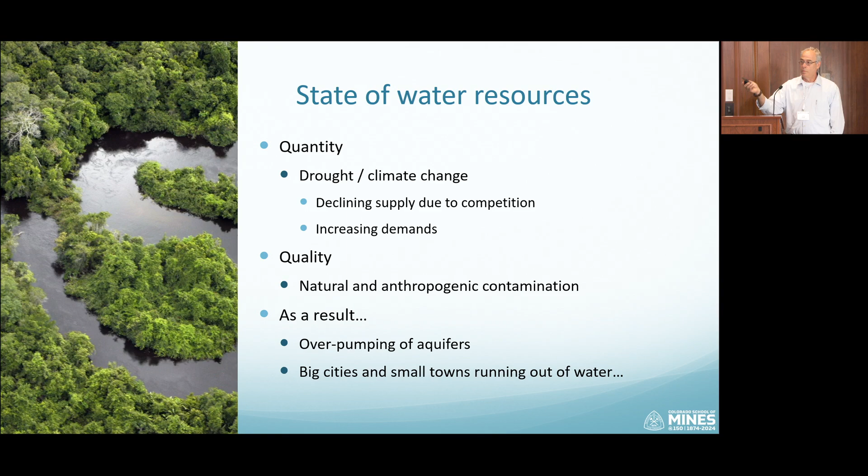So we have to think about where we are taking the next gallon of water. Of course, we can do seawater desalination, but that doesn't help inland communities. In Israel, probably it's easier because you're closer to the coast, but here it's more difficult. We can tap deeper wells, but that comes with a cost, with energy, and with higher salinity that requires us to go back to desalination.

And of course we can do water reuse, and for a very long time we're doing non-potable reuse. Israel is a great example of how you're doing it well, and more we are pushing into potable reuse. Under potable reuse, there are two options: indirect potable reuse, going through an environmental buffer to remove some of the yuck factor from the water, and direct potable reuse, so pipe to pipe, taking water, blending it with other water or as is.

And I didn't have to be persuaded to do research on direct potable reuse. When I was a graduate student with my dear advisor, Professor Childress, she pulled me into research funded by NASA on potable reuse for space applications, long-term space missions to Mars.

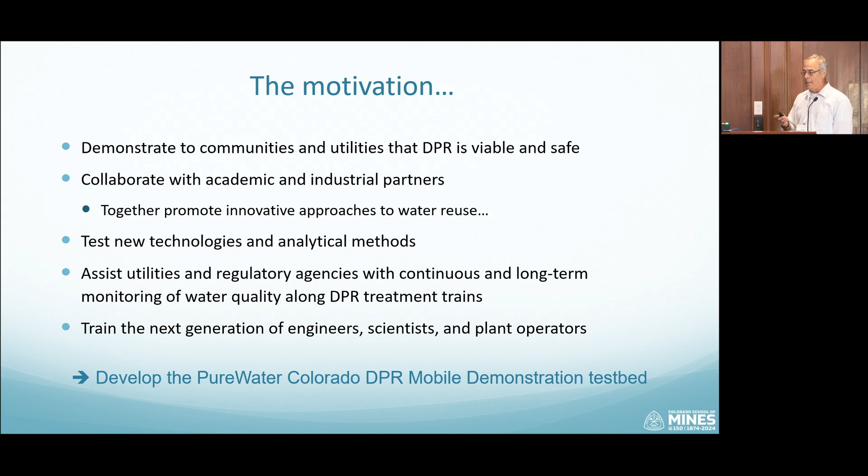And we built it in the form of a test bed where people can do collaboration in the research. This is an advanced treatment system with many processes pushed into this long and tall trailer, with the capability to compare side-by-side carbon-based versus RO-based direct potable reuse. So this is a quick trip into the trailer.

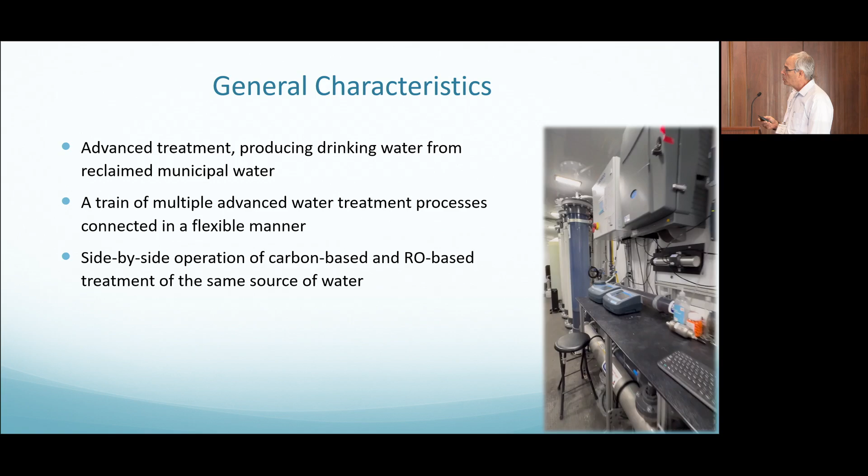First thing that you'll see on the left, sorry, the floor was not so clean, but Amiad filter from Israel, self-cleaning, followed by ozonation, several biologically active filters, carbon, and going into ultrafiltration system. Initially, it was microfiltration. We are all the time changing technologies.

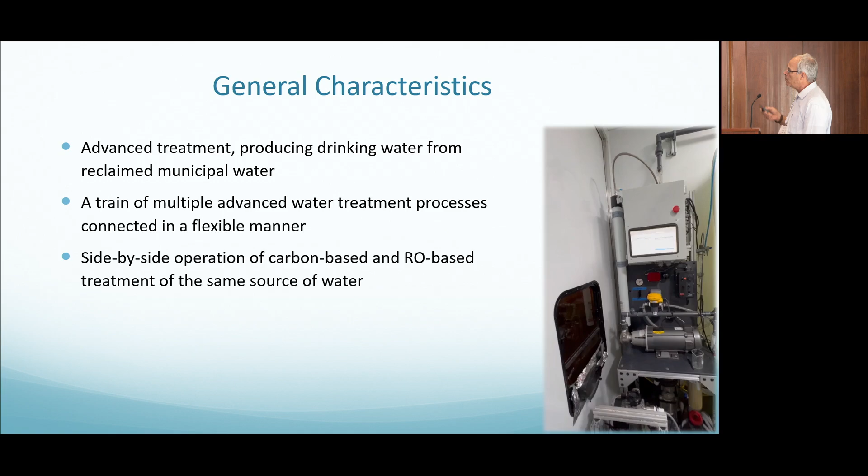Again, then moving to the right, a small CCD or CCRO RO system for parallel desalination, adsorption columns with different media, and then UV AOP and disinfection.

Overall, what we have there is a main train that treats around 7,000 gallons per day of reclaimed water, turns it into drinking water, fully automated, remotely or locally controlled, and a small side stream reverse osmosis system that's much smaller, that is also fully automated and can be operated remotely or locally.

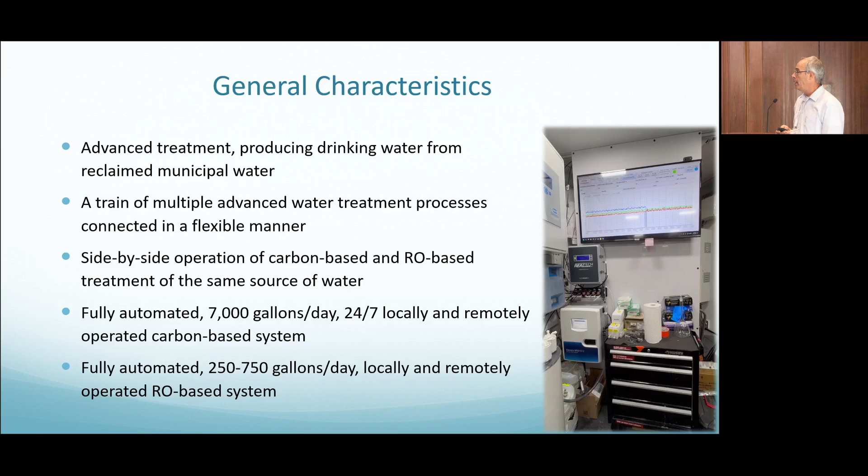So, I called it an ultimate test bed because it can bring, and it already brings, different disciplines to work together on one platform. We already created a very unique collaboration with different universities and national labs, and we were able to pull together many industries to help us both support the research, but also provide unique equipment for this trailer.

We deployed first in June of 2021, just coming out of COVID, in Colorado Springs. After a year, we moved to the city of Aurora, just east of Denver. Then after a little bit over a year, we moved to the city of Littleton, Englewood, and recently we moved to Denver Metro.

Unique things about it is that these first three are small plants, approximately 5 million gallons per day, and they are all tertiary treatment. So the water that we got into the trailer is relatively clean. And the big challenge started in May when we moved to a 150 million gallons per day wastewater treatment plant that's doing only secondary treatment, and that's very challenging on a system like that. So one of the conclusions is that tertiary treatment is really needed for potable reuse.

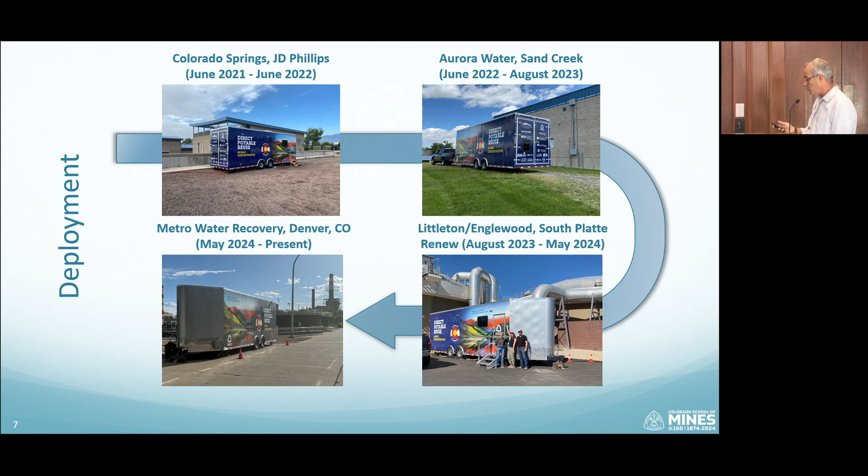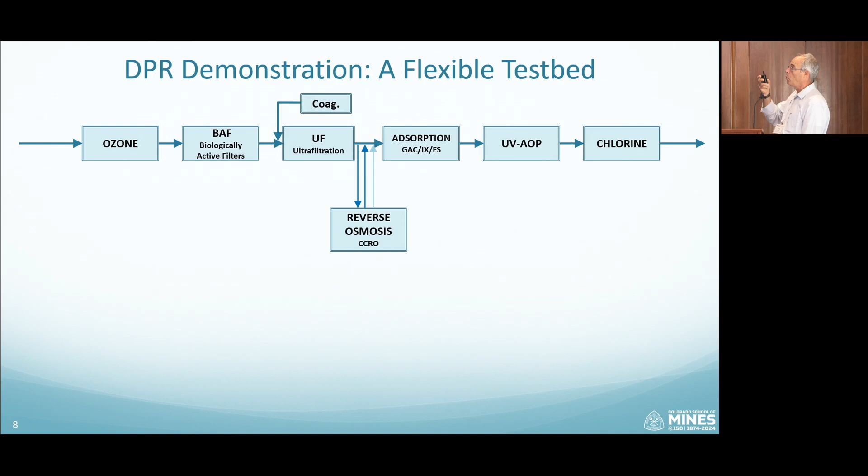It's currently supporting more than 7 mainly graduate and a few undergraduate students and 2 postdocs. So again, going into the treatment train, ozone, BAF, UF with pre-coagulation, adsorption with different media, UV AOP, and chlorination, with, again, the side stream of the reverse osmosis that takes water after UF, but returns the brine and the permeate back into the system. That was the sort of initial configuration.

We recently added a parallel train of UV LED in parallel to low pressure UV. And at the beginning, we operated with 4 GAC columns in parallel, and last year we moved to 2 pairs of columns in parallel, sort of 2 columns in series, but 2 in parallel, 1 GAC followed by ion exchange specific resin for PFAS removal, and the other pair GAC followed by Fluoro-Sorb, which is a unique organoclay also for PFAS removal.

As we move forward with the upcoming project, we will focus more on the comparison between RO-based and carbon-based DPR, and we'll deploy our RO followed again by UV AOP.

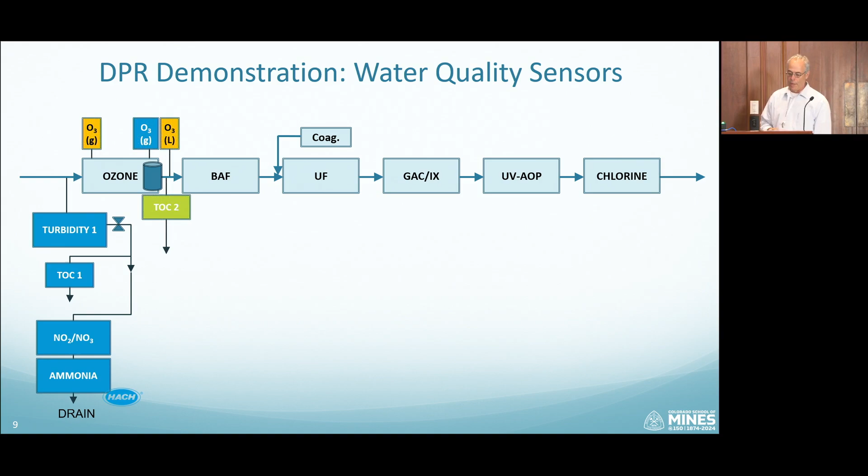We packed this trailer with many, many sensors in order to enable, again, and Megan gave a good introduction yesterday in her talk, to be able to do more data science in this trailer. So you can see here that we packed sensors around the ozone generator, many turbidity meters, many carbon analyzers, nutrients, pH, dissolved oxygen, UV, chlorine, a lot of ways to generate many data points as we operate.

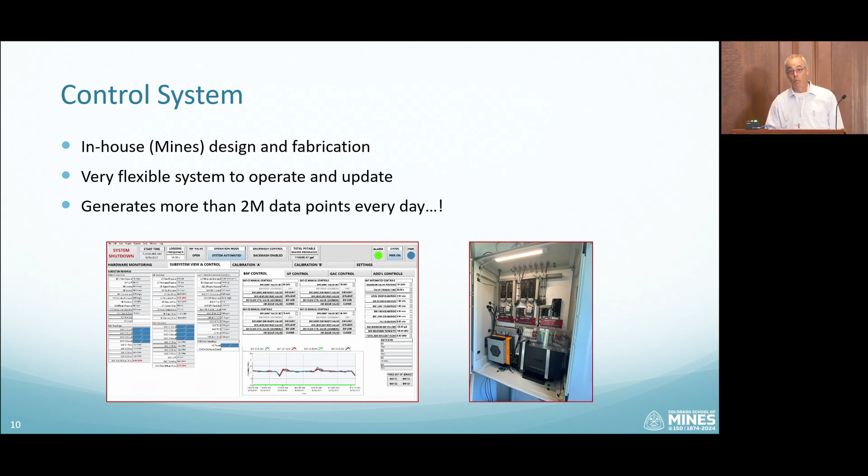And of course, in parallel, we do sampling campaigns to look at things that you can't measure with these small or simple sensors. We built a very sophisticated control system in-house, again, remotely controlled. Most of the time, this is an autonomous system that operates by itself. And when we collect data every 10 seconds, we're generating 2 million data points every day. When we go to 1 second, we generate many millions of data points every day.

It, of course, came with many challenges to build something like that, maximizing processes in a small footprint. Height is an issue, so most of the columns, the biologically active filters and the adsorption columns, operate under pressure. Because you have a mix of continuous processes with intermittent processes like ultrafiltration that need periodic backwash. We didn't have much money, so we had only 1 membrane.

You had to install a few buffer tanks or break tanks in the system in order to facilitate continuous operation. Finding the right size of some processes is not easy. We started with a very oversized UV, but since then we improved the situation. And again, maximizing data collection with a small number of sensors, but we were fortunate.

Hach, which is a leading company in sensors, put a contribution of more than $150,000 to really make sure that we collect a lot of data. So what projects are we currently running in this trailer?

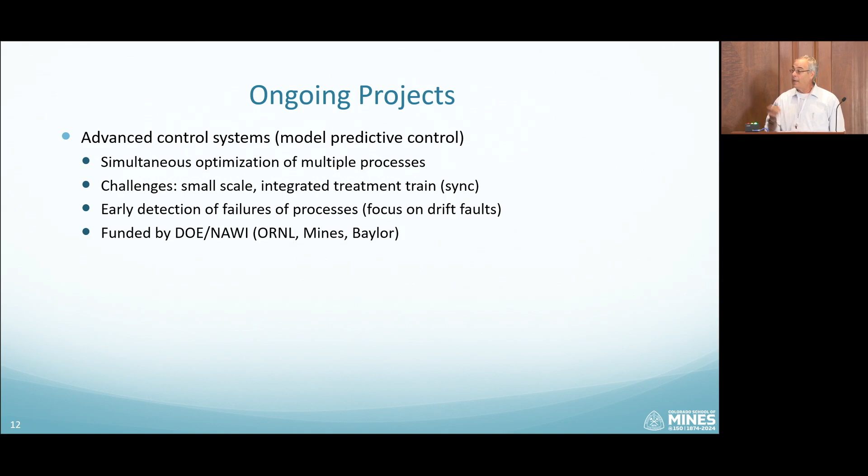The other project is focusing more on water quality. This is a project funded by the EPA with unique collaboration with the Water Research Foundation, CU Boulder, and Southern Nevada Water Authority. That's where we do a lot of modeling and validation of water quality improvements.

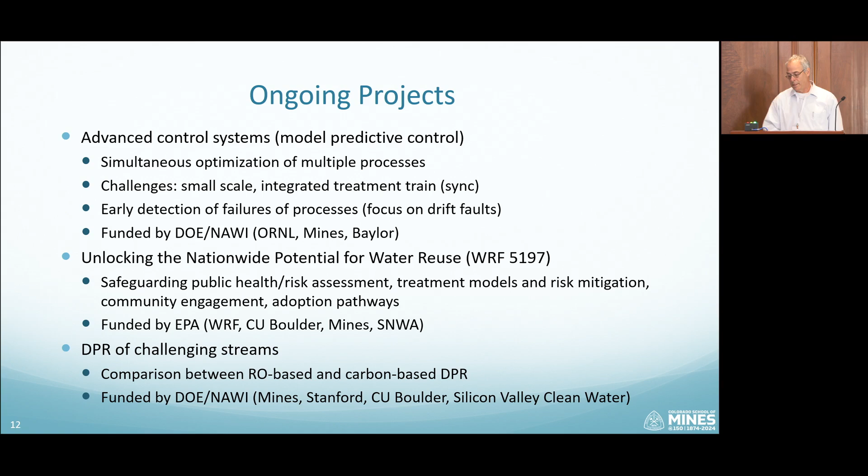And the most recent project that we have just started, also funded by NAWI, is looking at more challenging water going into systems like that, and more deeply looking at the comparison between RO-based and carbon-based DPR. That's a collaboration with Megan and Bill Mitch at Stanford, Karl Linden at Boulder. And that will be the first time that we're taking this trailer outside of Colorado, and we'll deploy at Silicon Valley Clean Water in Redwood City in California.

So a few examples. Again, Megan talked about digital twins and how to implement it. And I'll give you a very nice example of how we started doing it in the trailer. The unique thing about this is that you have to define an objective function of what you want your system to achieve automatically. And in our case, we said we want to minimize energy consumption, specific energy consumption, and maximize recovery.

And we started it with a small reverse osmosis system. It's a CCRO, again, technology that started in Israel. The idea is that you concentrate water in a closed loop, and once in a while dump the salt, bring new water, and concentrate it.

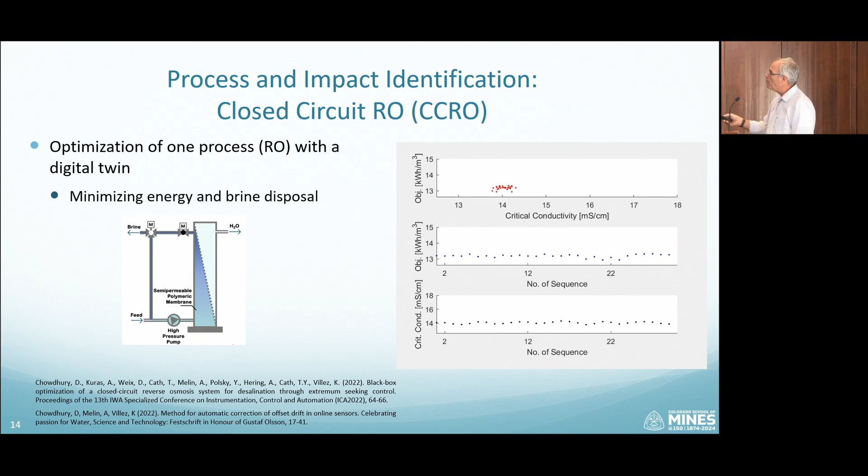What you see on the top graph here, on the y-axis, you have the one objective function of the specific energy, and on the x-axis, you have the conductivity of the brine that you're discharging. So this is the second objective function, and pretty much you want to maximize the concentration, which means that you maximize your water recovery. The other two graphs are the same graphs, but just as a function of how many concentration cycles we're going through.

And so you can see here what the computer is trying to do. It starts seeking an optimal point for both objective functions. We want to operate at the bottom point here, highest concentration and lowest energy. And you can see that it starts somewhere here. It says it's not a good point. It's going up to there and slowly drifting and finding a location here.

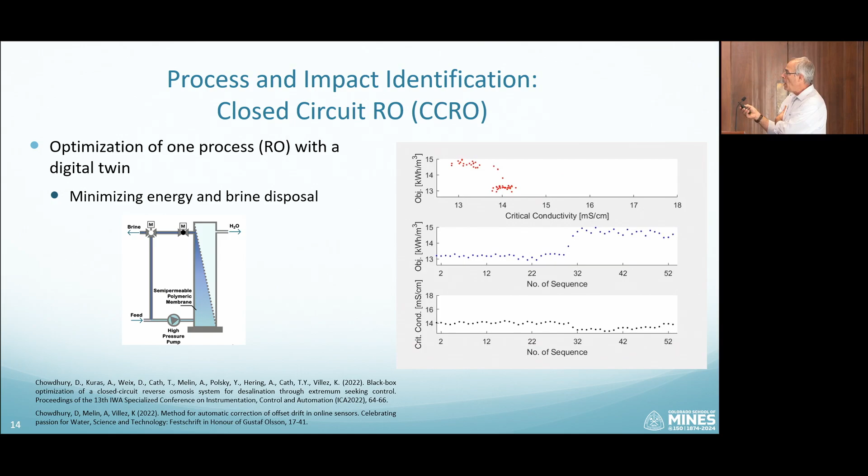Now, it takes many cycles of concentration to do it, and one of the objectives of the research now is to minimize how many cycles it will take for the computer to seek the optimal point. And what we're going to do is to now take all the processes in this trailer and do the same thing and eventually combine them together.

So, one example of the things that we do in preparation for that is what we call process and impact identification, to dynamically understand how each process is affected by things that happen within the process, but also how one process affects downstream processes. One example is our ultrafiltration unit. We are backwashing every 30 minutes. It takes around 4 minutes to do it. And we are dosing coagulant ahead of the membranes, and it's a common practice.

But when we started operating with continuous dosing of coagulant, that caused severe fouling on the membrane. And what you can see here is that we are accumulating head loss, or increasing the pressure, because of fouling very quickly. And it was a nightmare because we had to do clean in place every week or even less than a week.

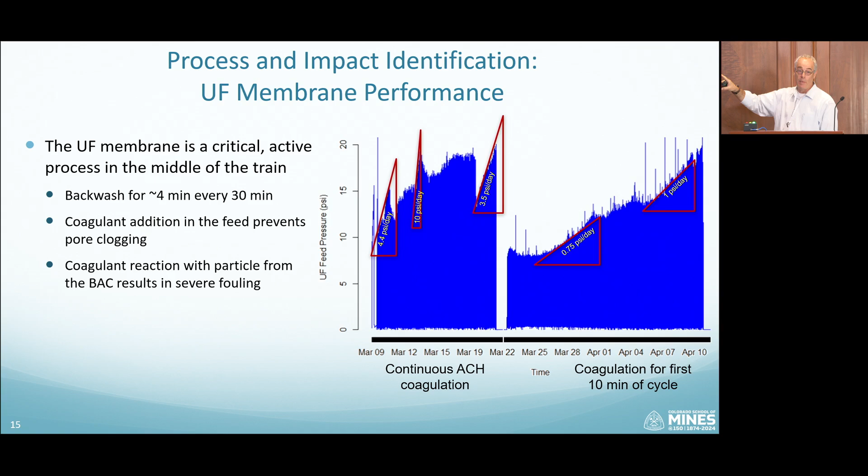But then we found a paper from a group in Israel that looked at optimizing ultrafiltration before seawater desalination. And they showed that if you do intermittent dosing of coagulant, you can save a lot of headache. And that's what we saw after we decided to do only 10 minutes of coagulation in every cycle. You can see that the head loss increase is much, much slower. Currently, we are doing clean in place only every 5 to 6 weeks, and machine learning and digital twins will be able to figure out how much longer I can run between backwashes, and how long to do dosing.

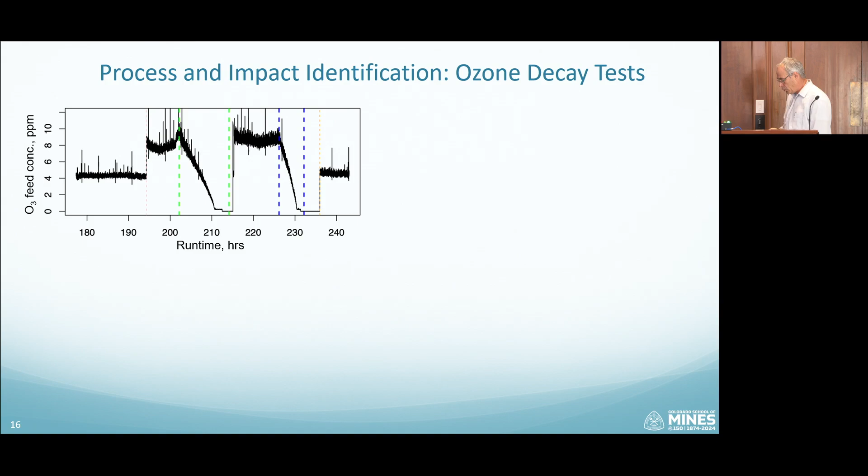Another example of process impact identification, looking at ozone and how it impacts downstream processes. So here we run experiments where we were slowly stopping the ozone dosing, or reducing the ozone dosing, initially for 12 hours and then in another experiment for 6 hours. What we really monitor and target is a very specific ozone to TOC ratio. This is a requirement for direct potable reuse.

And of course, if the ozone dose goes down, the ozone to TOC ratio also goes down, since the TOC doesn't change much. But uniquely, you can see that during these experiments, the TOC concentrations start increasing. And this increase in TOC, and probably also changes in the characteristics of TOC, causes severe performance issues in the ultrafiltration unit. You can see a very fast increase in transmembrane pressure across the membrane because of this additional fouling that goes into the membrane.

Again, these are things that you cannot do in a water treatment plant or in a wastewater treatment plant. You cannot stop and introduce faults or problems. This is something that you can do in a unit like that. And of course, looking at energy consumption within the trailer, if the ozone dose goes down, the energy consumption goes down.

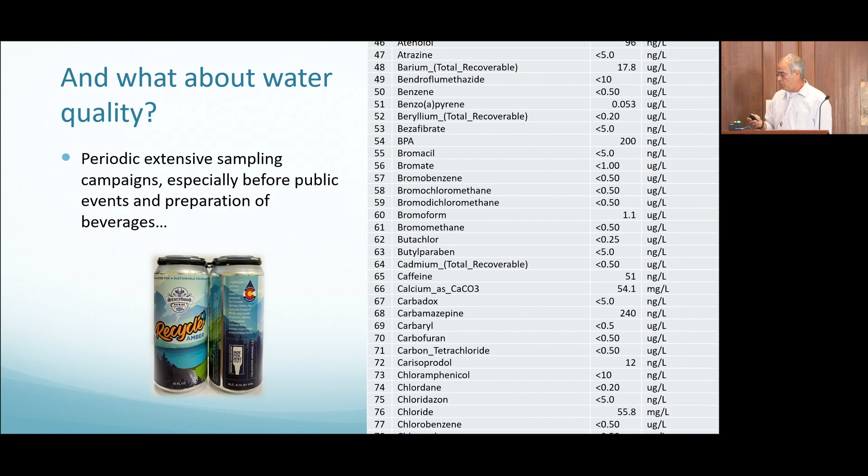Talking a little bit about water quality going in and out of this trailer, we are running periodic, extensive analytical or sampling campaigns, especially before we make water for public events. We made a few batches of beer. There's one big batch of whiskey now in preparation, so if you want, add yourself to the list. And so we are looking into what's happening to the water. So I'll just give you a few examples of what we see in this trailer.

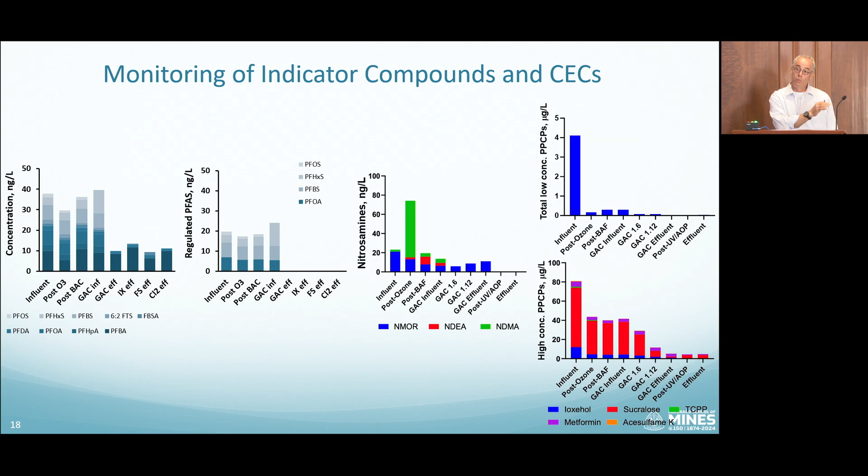And of course, we're doing research on other emerging contaminants of concern. On the top, the sum of small concentrations of different PPCPs. And again, you can see that there's a high dependence on GAC to do most of the work. But we also have to think about whether that is the solution, knowing that we need more pre-treatment to protect some of these downstream processes. This is all fresh data from the last few weeks.

One of the things we are now involved in researching in Colorado is how to prepare communities and utilities for new regulations. Specifically, I'm referring to Regulation 31 in Colorado, which talks about improving or maintaining surface water quality. That immediately means that your discharge quality will have to improve. The target for Colorado is that by 2037, which is a long time, but for a large utility it's not so long, we're talking about reducing discharge standards to 2 milligrams per liter total nitrogen and less than 0.2 milligrams per liter total phosphorus from current levels.

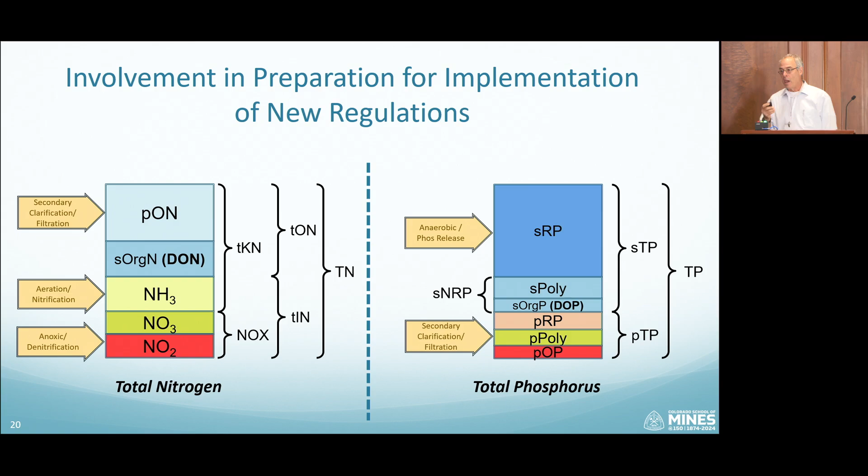That's not simple. You can see the same thing in the phosphorus system. We know how to remove particulate. The soluble reactive phosphorus, phosphate, we know how to remove. But again, when it comes to dissolved organic phosphorus, you are in a big challenge.

So when you are a utility whose dissolved organic nitrogen discharge is at 1.5 milligrams per liter, and your regulation is going to be 2 milligrams per liter, you start scrambling and figuring out how do I remove this total organic nitrogen.

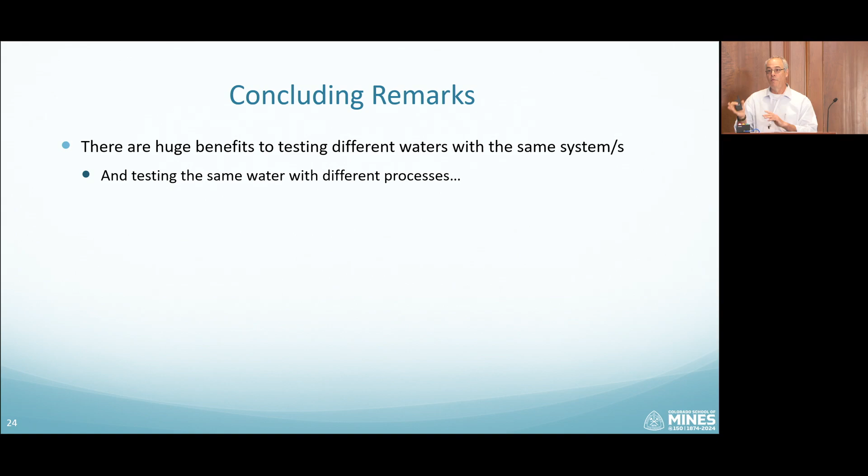At the same time, it's very interesting that you have two trains of different processes and you can compare between different approaches.

I didn't show much, but I can tell you it's a nightmare treating secondary effluent compared to tertiary effluent. This is something we've been struggling with for several months now. And RO is not always the key for successful DPR.

I think that will be fun to do—more deeper research in California next year.

Small communities will probably implement things like that, and advanced control systems and data—better understanding the data to your advantage—are critical for the future of water and wastewater.

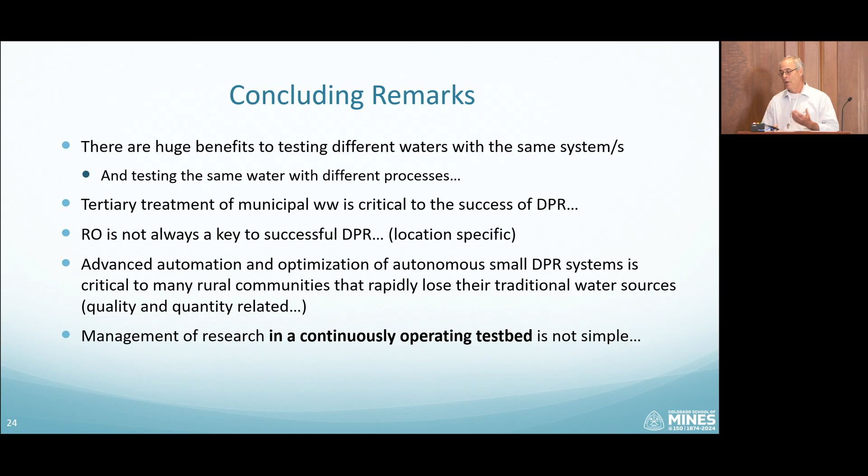I think the important thing that I learned is that managing many projects in a small footprint is not simple. You have different students running different experiments at the same time. Managing who is doing what, so as not to impact other projects, is not simple. But it's fun. So thank you, everybody.

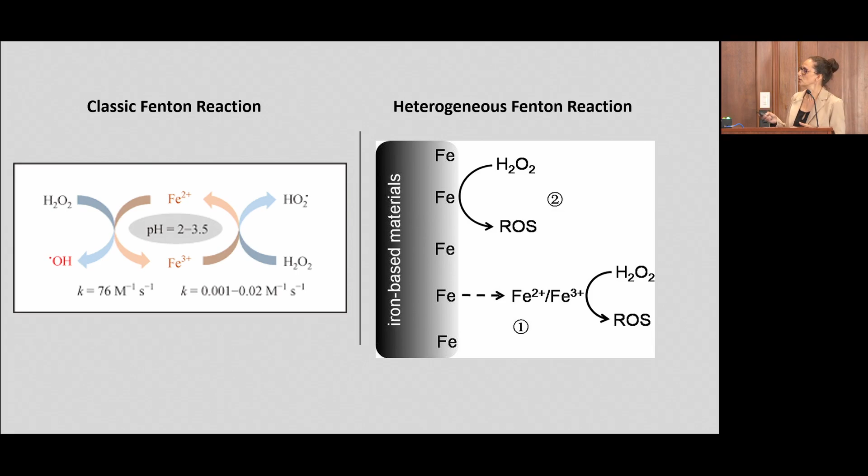So a lot of work has been done on trying to use heterogeneous Fenton reactions as an advanced oxidation process. In our lab we've been working with clay minerals and oxides as sorbents, and the idea was to combine the two technologies together. Can we remove the pollutant and then use the adsorbent also as a catalyst?

The reason we use clay minerals is that they're very low cost, abundant, and not toxic. They have a huge surface area. The surface area of Montmorillonite, which is the clay we use, is about 800 meters squared per gram, which is about 2 basketball courts for 1 gram of clay.

So it can be used as a sorbent very efficiently, and we can also alter the surface properties to make it more specific towards the targeted pollutants we want to address.

The idea was to take iron oxides and precipitate them on the clay mineral surface. The clay would be used as a support and as an adsorbent, and the iron oxides can be deposited in nano-size form, creating a large surface area that's very reactive, both as a catalyst and as an adsorbent. So we started out doing that.

This is work done by one of my postdocs, Dr. Maria Joffe. She synthesized several clay minerals and deposited different species of iron oxide on the clay. We looked at hematite, magnetite, and we also deposited amorphous iron oxide on that clay. We did a lot of characterization.

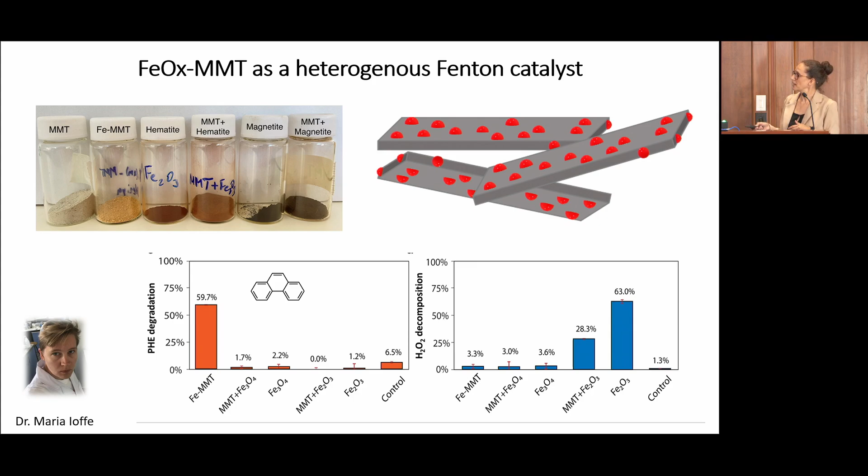So some of the surfaces activate hydrogen peroxide decomposition, but that doesn't mean it creates the right radicals to degrade the phenanthrene. The iron-clay composite that worked best was this one, amorphous iron oxide with a lot of hydroxyls, iron oxyhydroxide, which degraded phenanthrene quite well, and the amount of hydrogen peroxide decomposed was quite low.

You can see here, again, the decomposition over time, or the destruction and degradation over time, of phenanthrene, and you can see the decomposition of hydrogen peroxide. So you need a very small amount of hydrogen peroxide to get quite nice degradation of phenanthrene.

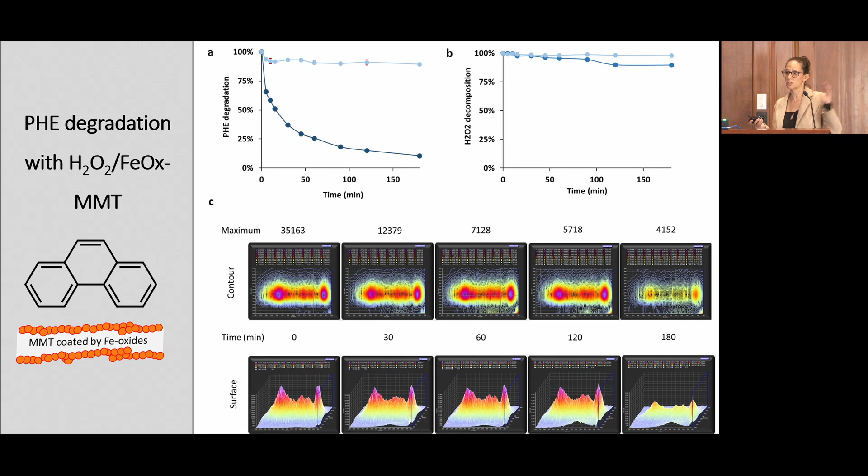We looked for byproducts in the solution using GCMS and EEMs, but we couldn't find any coming up. So our thought was that maybe the rate limiting step was the diffusion of phenanthrene to the surface, and the degradation occurs quite quickly, which is why we're not seeing any byproducts.

One more interesting thing we found is that if we add hydrogen peroxide before the phenanthrene, we can still get quite nice degradation. So we add hydrogen peroxide, and it gets pre-adsorbed to the surface, but it doesn't decompose. Then when we add the phenanthrene, it gets degraded, which is quite interesting. What we think is happening is that the phenanthrene reaches the surface where the hydrogen peroxide is complexed with the iron oxide, and then the whole thing is activated.

We did this kind of cycle experiment where we added hydrogen peroxide, the catalyst, and phenanthrene. After the phenanthrene was degraded, we spiked with more phenanthrene without adding more hydrogen peroxide. This is the graph you see here. Every time we spiked with phenanthrene, we can see the degradation, and we can also see the decomposition of hydrogen peroxide. Every time we add more phenanthrene without adding more hydrogen peroxide, it gets decomposed, kind of linearly as well.

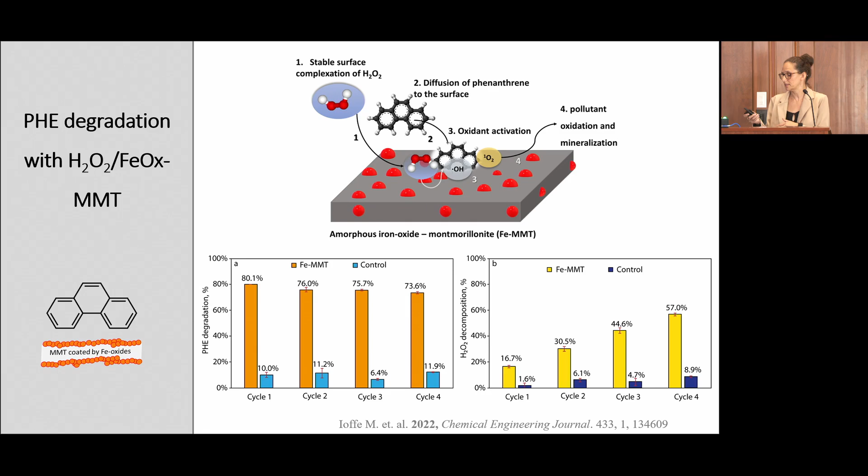So we looked at catechol in the system, because catechols, which are species with a benzene ring with two adjacent hydroxyl groups, can complex with iron and reduce it, at least in solution. We asked whether adding this to the system would reduce the iron on the surface of our clay, and whether this could initiate faster hydrogen peroxide decomposition or activation, enhancing the formation of reactive oxygen species. So the question was, will the catechol, or in this case the gallic acid, reduce the iron on the surface of the clay, and will that enhance the decomposition of hydrogen peroxide?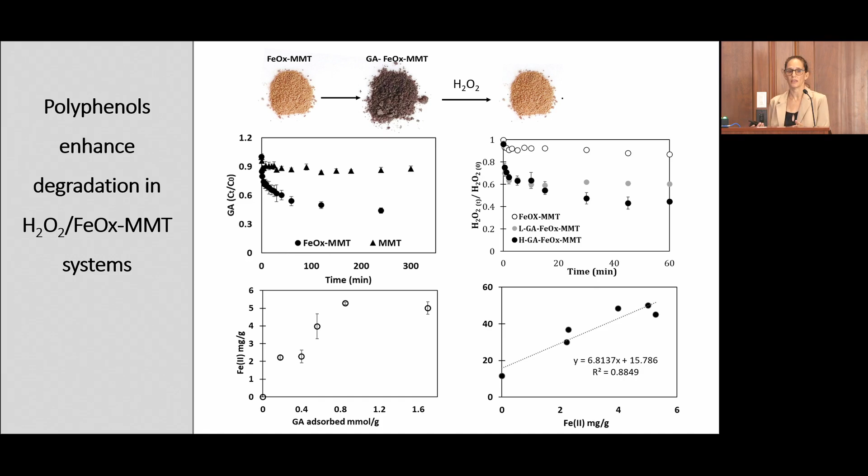So if we think about this, if we have a wastewater rich with phenols and catechols, this might be a very good system to try to degrade them. So we looked at exactly that. We chose 5 different polyphenols that you might find in olive mill wastewater or winery wastewater, with a bit of variation in structure, and wanted to see whether this type of adsorption-degradation reaction could work for these compounds. So we chose these 5 compounds here.

Spoiler. So we chose these 5 compounds here that you see. 2 of them have catechols, so it has the benzene ring with the 2 hydroxyls - that's the CC and the DHB. And the other 3 have similar structures, but not exactly a catechol structure. We looked at the adsorption, and then we looked at the degradation.

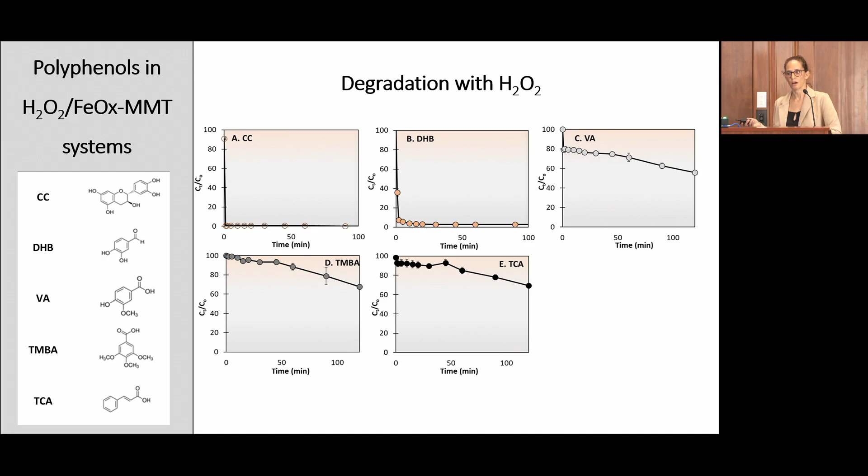We looked at the different species of radicals, and we saw that you can get 3 or 4 different reactive oxygen species, but I want to show the most important point here.

So what we're thinking is going on is that these catechols complex with the surface, reduce the iron, and enhance the reactive oxygen species formation, which can then leave the boundary layer and also attack the pollutants in the water.

Thinking about this and going forward, we said, okay, we really want to create a platform that attracts the pollutants to the surface, and then we can degrade them more easily. So we created a composite that had both the catalyst we were talking about before, the iron-decorated clay, but also we added a polymer whose job was to attract different micropollutants.

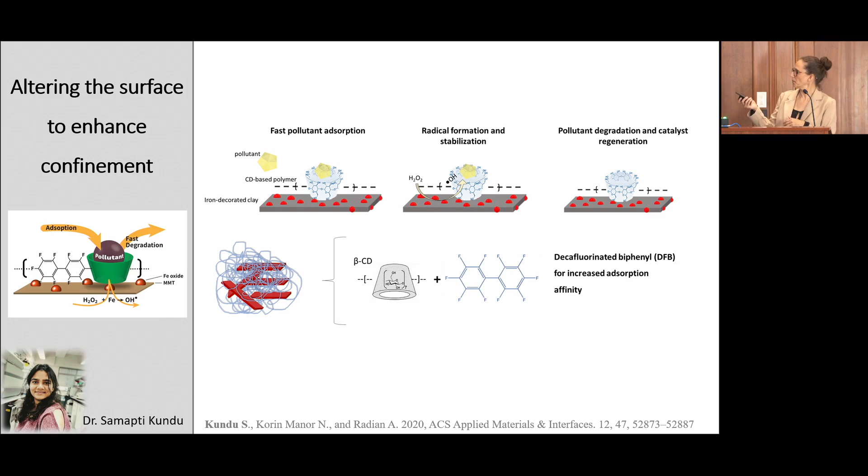The composite was created by polymerizing these monomers to a polymer and kind of intercalating the clay within. And we looked at several different compounds.

Initially, we looked at 3 different compounds, the compounds in green, to get an overview of whether it's good for the removal of organic pollutants in general. And then we looked specifically at PFAS removal and degradation, because PFAS are the most recalcitrant family.

So just to show the first part, we looked at bisphenol A, carbamazepine, and PFOA, the 8-carbon chained perfluorinated compound. You can see here the adsorption to all the different parts of our composite - to the Montmorillonite clay with the iron oxide, to the Montmorillonite clay with the iron oxide and the beta-cyclodextrin, Montmorillonite clay, iron oxide, and just the biphenyl perfluorinated polymer, and then the whole composite together.

We can see that each one of the pollutants has an affinity to a different part of the composite. We have carbamazepine, in blue, which likes the clay iron oxide. And we have bisphenol A, which likes the beta-cyclodextrin cup. And then we have PFOA, which is adsorbed to the polymer mostly, but also a little bit to the beta-cyclodextrin cup. So that was in terms of adsorption.

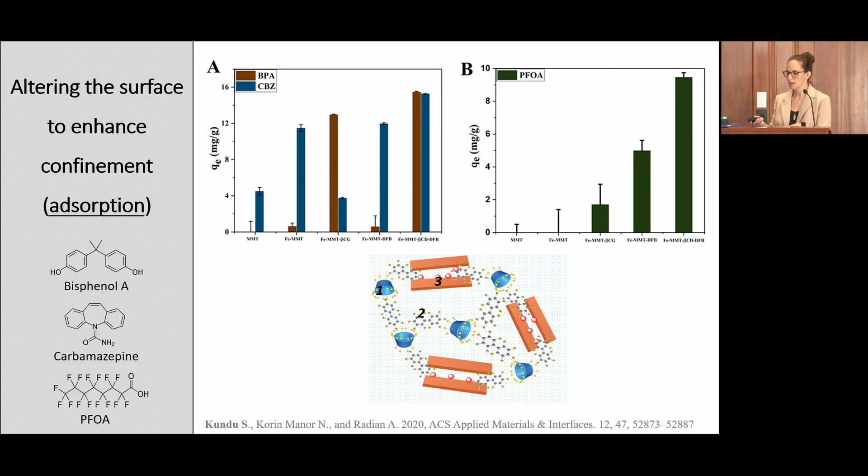We can get really nice adsorption trends. And when we add hydrogen peroxide, we could also see the degradation of all of these 3 compounds, even though their recalcitrance is very different.

We were quite pleasantly surprised that even the PFOA was degraded quite nicely, and I'll show some byproducts in a minute. We can get quite versatile results in terms of the different types of pollutants we're removing, and we can degrade these pollutants after the sorbent is spent. We looked at the different reactive oxygen species, and we mostly saw that the hydroxyl radical was the main species here.

We moved on to looking at perfluorinated compounds, and we took 7 different perfluorinated compounds that you see here. On the x-axis, you can see the different amount of carbons in each of the compounds. We looked at the adsorption to the different parts of the composite, and we looked at the degradation. In terms of adsorption, you can see that the larger, more hydrophobic perfluorinated compounds are removed quite well, whereas the small ones are not removed almost at all, and this is something that comes up again and again, and I also saw it in your results, Tahi. So the small ones are very mobile, and they don't adsorb to anything.

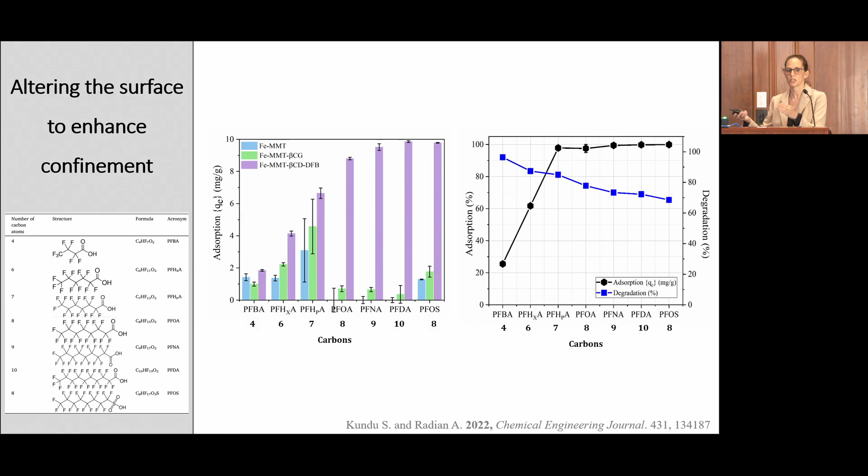But the small fraction that does adsorb is degraded quite nicely, and as we increase the chain length of the perfluorinated compounds, the degradation decreases a little bit, but it's still 70% degradation.

So it's not complete mineralization. We can see some of the six carbon chain perfluorinated compounds coming up in the system, but still we are getting quite nice degradation of these products. But we were still very concerned about the fact that we can't even remove the small compounds, and some of our ongoing work is focused on removing the shorter chained perfluorinated compounds.

So we went back to some of the polymers we've been using in the past that are positively charged. The previous composite is negatively charged, which makes it very difficult to adsorb the small negatively charged polar compounds. So we took the clays and we added some positively charged polymers to see if we can adsorb the PFBA.

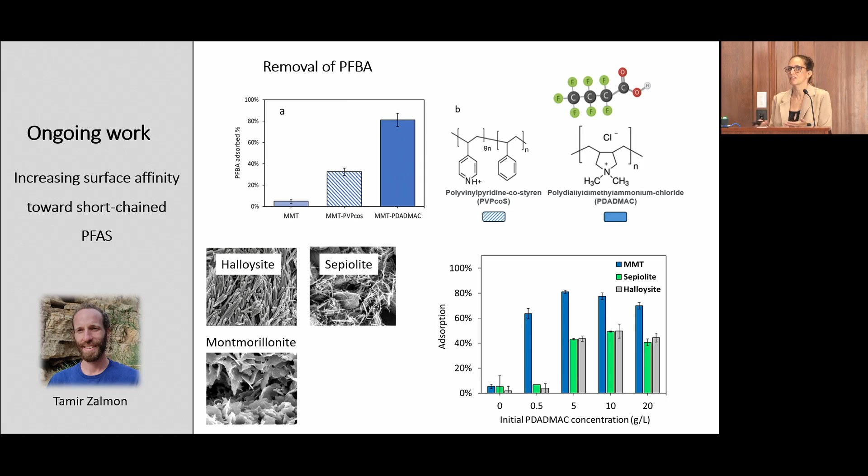If we compare it to the removal of PFOA and PFOS, those are removed much better by this composite. We're getting 99.9% removal of the longer chain perfluorinated compounds and about 80% removal of PFBA, which is quite nice. So if we manage to take care of PFBA, usually that means that we're also removing the bigger ones. These are mostly electrostatic interactions between the negatively charged PFBA and the positively charged composite.

And we wanted to see if we can also degrade it. Just one more word about that: most sorbents, when you add in the longer chain perfluorinated compounds, that hinders the removal of the shorter chain PFAS, but not in our case. There's enough room there for all the PFAS, and also as we increase concentrations, we're actually getting an increase in removal. So there's kind of a priming of the surface that makes it more hydrophobic, and you get higher removal rates.

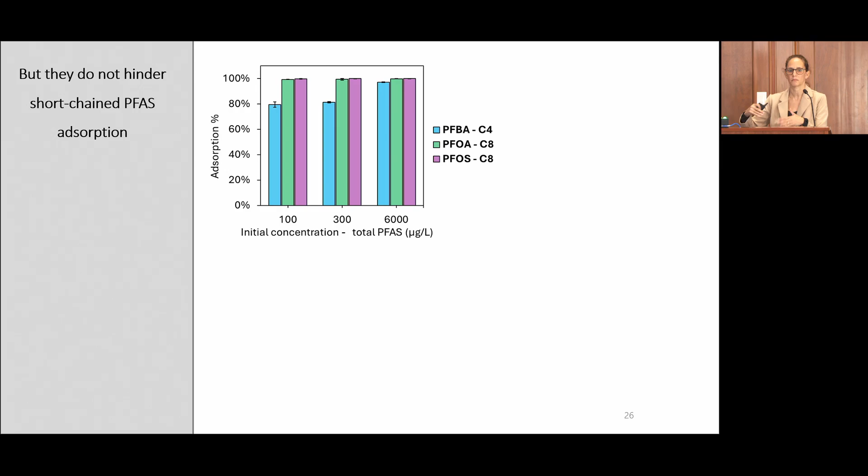What is hindering the removal is salt. Higher concentrations of salt will completely deactivate our sorbent in this case, because these are electrostatic interactions. So going back to what I wanted to say before, we wanted to see if we can degrade what's adsorbed, because we were using the iron clay composite with the polydadmac, and we can get really nice removal rates, but the catalyst is deactivated, because previously the polymer was sitting in between the different clay layers, but now the polydadmac is interacting with the clay surface electrostatically. It's a positively charged polymer, a negatively charged clay, and that's deactivating our catalyst.

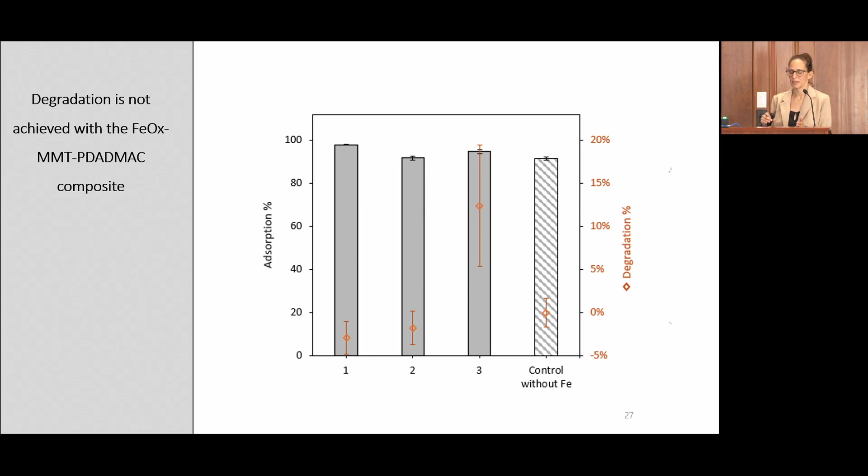So we're getting high removal rates, but about 10% degradation. So this platform is not working for the PFBA, but we did go ahead and test it as just an adsorbent with real water. So we have a groundwater well quite close to where I live in Yokneam, which is contaminated with really high concentrations of just PFBA, which was perfect for our project, but not so great for the locals in terms of the groundwater.

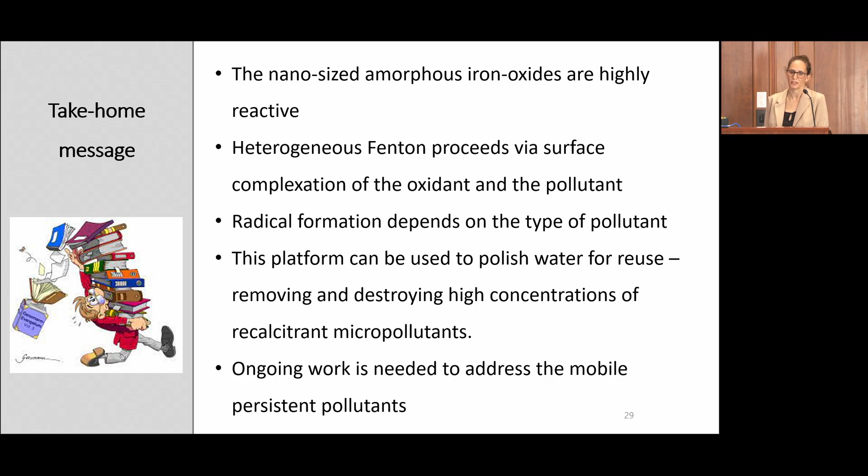What we think is that this platform can be used to polish water for reuse, removing and destroying concentrations of different recalcitrant micropollutants, but for the very mobile, polar, persistent, small compounds, this is still not good enough. So we're still working on it, and hopefully we'll find some solutions in the future.

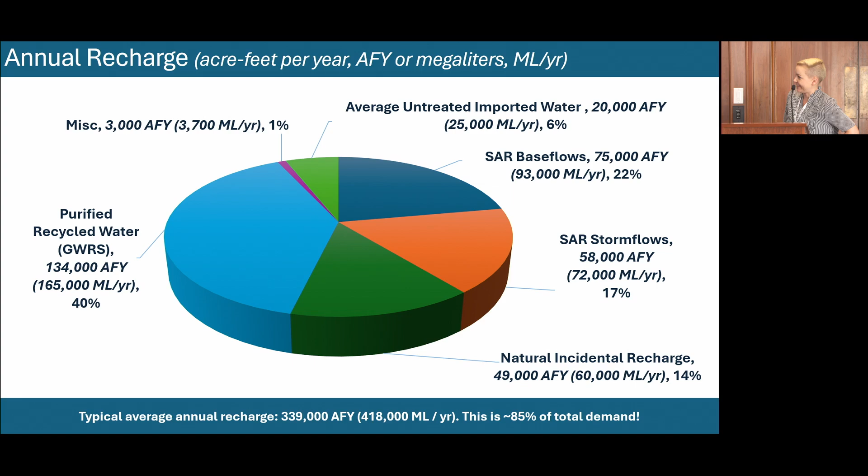Back, okay. I did it again. Pointer. If I say the word somehow, that helps.

So all in all, our typical average annual recharge is about 340,000 acre feet per year, or I tried to do the metric conversion. Maybe I should have done million cubic meters. I think I saw that elsewhere, but about 400,000 megaliters per year. So a lot of recharge.

All right, so just a quick slide on the purification system. We take the effluent, secondary effluent. You can treat it. It works. I know, Zahi, you said you had some challenges in your project, but for us, it's actually secondary effluent from the OC San. We put that through a low-pressure membrane system. Some cells are microfiltration and some cells are ultrafiltration because we've started transitioning to the newer type, the ultrafilters. Reverse osmosis, and then UV with hydrogen peroxide.

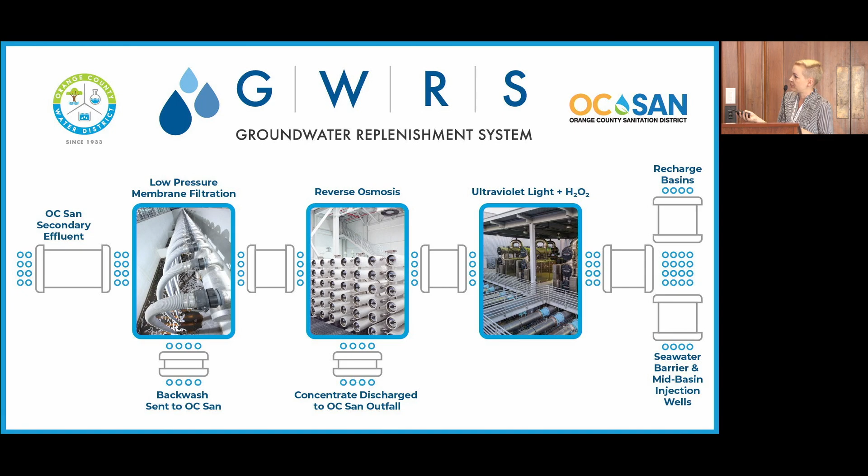So most of the water goes to those spreading ponds like I showed in the picture. We have 1,100 acres, or I think that's about 400 to 500 hectares of wetted lands that we use for recharge. So a lot of recharge spreading ponds. And then about a third goes to injection wells, including for recharge and also for a seawater intrusion barrier.

Okay, so given our mission, which is the big umbrella is groundwater management, and then as part of that, potable reuse on a very large scale, of course, we have no shortage of interesting challenges. With the river system we manage, we have constructed wetlands, endangered species that we have biologists that go out and monitor bird populations. We've got PFAS issues, as I mentioned, we're building 60 different PFAS treatment plants at these groundwater extraction well sites for the drinking water production wells. So lots of PFAS work going on.

We have our advanced water purification plant with membrane fouling and high energy costs. Our energy bill every month is, I think, almost $2 million or so, $1.5 million US dollars. So lots of energy to run the RO. Our recharge basins, of course, clog and have to be managed. We do a lot of piloting of new technologies, which everyone says 6 months and really takes 2 to 3 years for every project. We've had staff retirements, so we're facing that issue of folks retiring, and that knowledge kind of leaves with them sometimes. So lots of different challenges.

One of the ways that we try to address some of this is through maintaining an active R&D program. It's pretty cool, I think, that we have such a program. Of course, I'm biased because I run that program, but it's not so common to hear of a water or a wastewater agency that has a research group. Sometimes they do, and it just goes by a different name, and you have to talk to them to find out. So I'll say a little bit more about that.

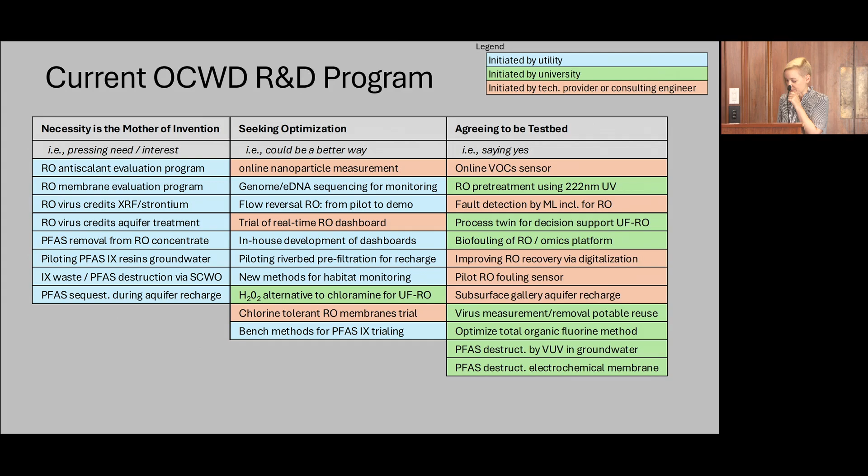A couple takeaways: something I already knew, but it's nice to see in color, is that universities and solutions providers—the green and orange—really do play a significant role in helping us be an innovative water agency. These ideas come from them, and we hear about it because we're trying to get out there and meet people, or they come directly to us because they know somebody.

But I also thought it was interesting that the first column is just all blue. It kind of makes sense, since these are pressing things we think are important issues that need addressing, so we started the project ourselves. But it still surprised me not to see any orange and green there, so I wondered: are the universities and solutions providers doing enough to ask us what our pressing challenges and needs are, to help inspire them to work on those topics?

After I put this slide together, I thought of one example where this was the case—really the only example I can think of. The University of California Irvine has their research center on water called Water UCI, and they actually have a committee of Southern California utilities, which I'm on, where they ask us what topics need attention. We provide some funding, they pool it, try to go out and get grants to match it, and then they do the project.

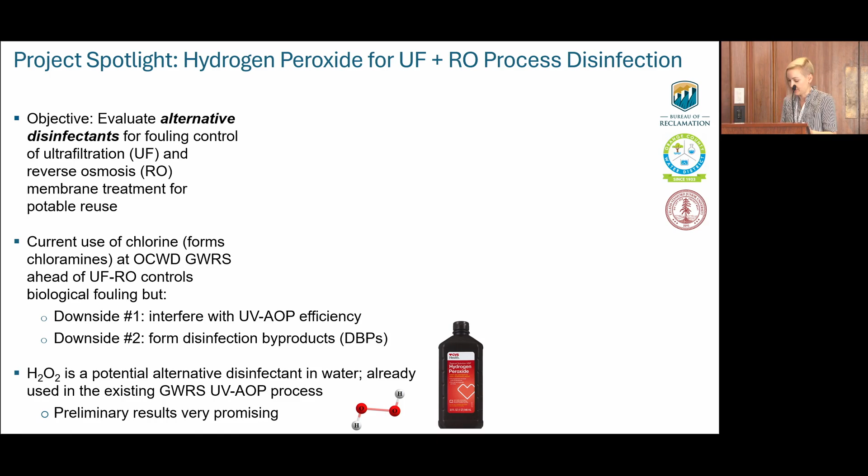But with hydrogen peroxide, we don't see any formation of NDMA or the typical trihalomethanes and haloacetic acids. And we already need hydrogen peroxide for our advanced oxidation process. So we've actually targeted it so that, since we want 4 milligrams per liter of hydrogen peroxide going into the UV AOP, we put enough hydrogen peroxide in, at pilot scale, the feed of the ultrafilter, which then has a demand, but then some residual of hydrogen peroxide makes it to the RO, and that has some demand, and then the residual that makes it to UV AOP would in theory be just what you already need anyway for the advanced oxidation. So pretty elegant.

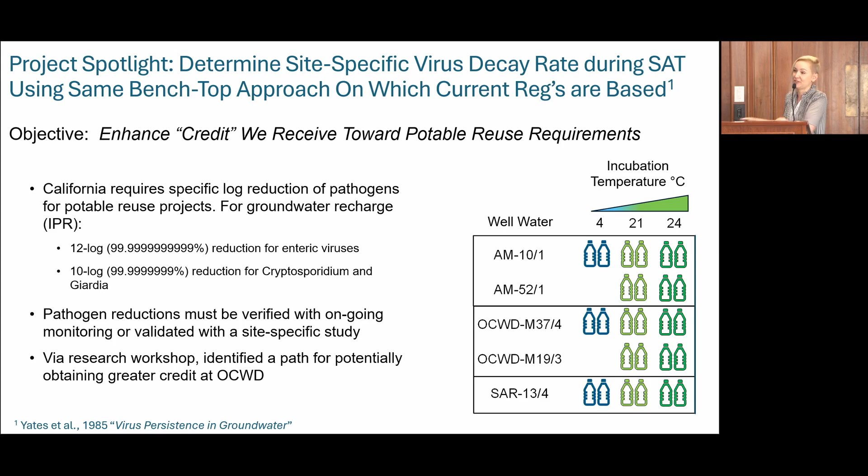I will skip the next project because I'm over time, but this is essentially us trying to get more credit from the regulators for virus removal in the subsurface, the soil aquifer treatment. We take our advanced purified water and put it underground as part of groundwater recharge. So we do enjoy some soil aquifer treatment, but we don't get much virus credit for it. Through a workshop, we heard a retired regulator say that there was a path for doing this in the California regulation, which we didn't understand prior to that. So it really piqued our interest and motivated us to do this project.

All right, I will just wrap up. I won't repeat myself here. Innovation's important, collaboration's important. Thanks so much for your attention.

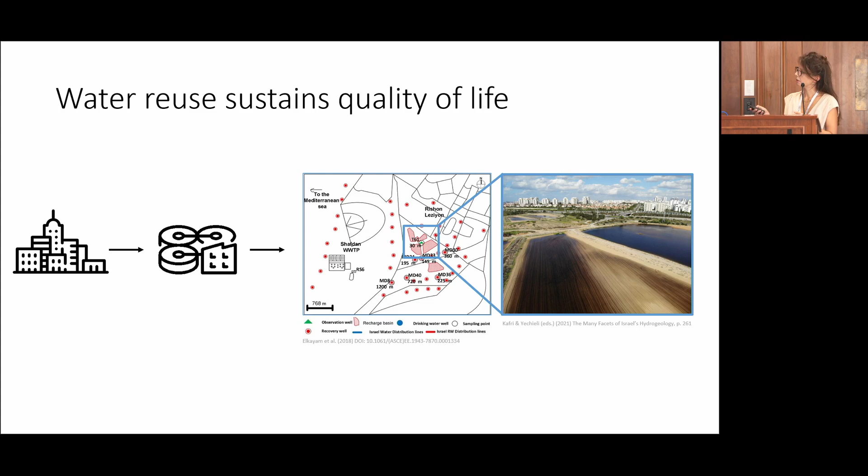We treat our wastewater through conventional primary mechanical treatment, secondary biological treatment, and then, as you heard today and also yesterday, we spread the secondary effluent over infiltration ponds. They go through physical, biological, chemical reaction, and then after 6 to 12 months, they are collected and used for unrestricted irrigation.

So in that scheme, which we already heard about, I want to highlight two important points that I'm going to address today. One is the fate of trace organic chemicals - for example, pharmaceuticals, herbicides, pesticides, hormones, you name it - and also antimicrobial resistant bacteria and genes. What is their fate?

We want to eliminate their presence because we want to reuse the water for irrigation. Another important point is that we want to augment the wastewater amount.

For example, we can receive industrial waste at the municipal treatment plant, but then we need to make sure we have proper pre-treatment beforehand. For example, if we look at the printed circuit board industry, we're talking about large amounts of wastewater that can be released to the municipal treatment plant. However, we need a pre-treatment to remove heavy metal and precious metal from this water.

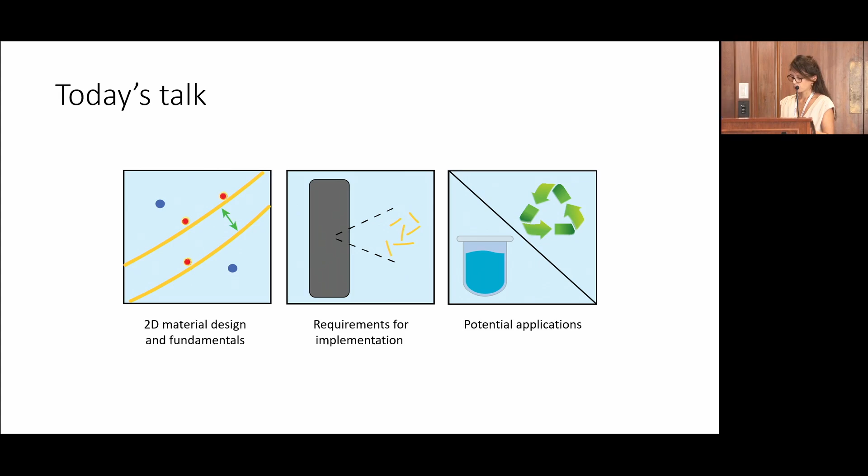So I'm going to touch on these two today. Broadly speaking, I want to go through the design of two-dimensional nanomaterials for adsorption of heavy metal - in that case using molybdenum disulfide - and for catalysis and removal of trace organic contaminants, in that case using manganese oxide nanosheet. In both cases, the focus is given to two-dimensional nanomaterials.

Then we want to go over the requirements for implementation. Let's say we have these nanomaterials - how do we implement them at large scale and then demonstrate the application? So that's the logic scheme of the talk.

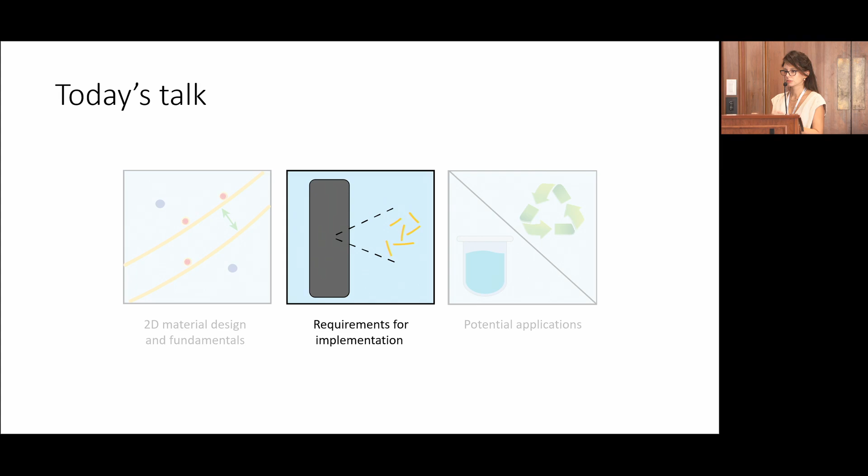But today I want to start from the middle, because I want to talk about the requirements for implementation, not necessarily for my own development, but in general. In case you have a nanomaterial that can be used for water treatment, what do you need in order to implement it at larger scale?

There are many barriers for implementation, which were highlighted in many review papers, starting from upscaling and cost. However, this problem is expected to decrease over time because of the widespread use of nanomaterials in different industries, not necessarily in the environmental context.

The second challenge, or barrier, is maintenance. We want to make sure that we can recover the active nanoparticles from the treated water. We want to regenerate them, we want to reuse them.

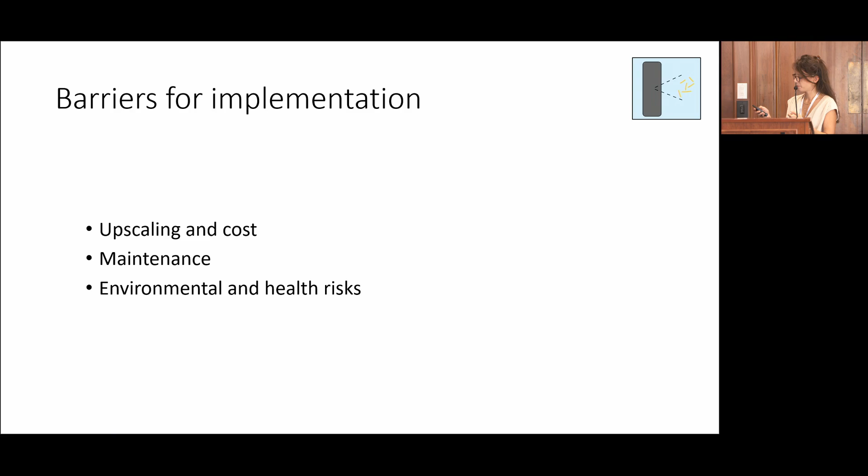Third, we want to avoid any environmental and health risks. This is also important because once we shrink the dimension of a material, different phenomena occur - that's what makes nanomaterial really appropriate and really reactive, and therefore they might have negative aspects that we want to avoid. This was highlighted in different reviews over the years, and we want to make sure that whatever development we work on, we overcome this barrier.

One essential tactic to overcome this barrier is to have a strategic pairing of the nanomaterial with a less mobile platform - something that is much larger and that will make it much easier for use.

So if we want to put it on a scale of time - while the focus so far was given to nanomaterial design, now we want to focus on strategic pairing to platforms in order to allow practical application.

So my lab came up with this platform selection guide because it's important that we select the appropriate platform for the application or the type of nanoparticles that we use.

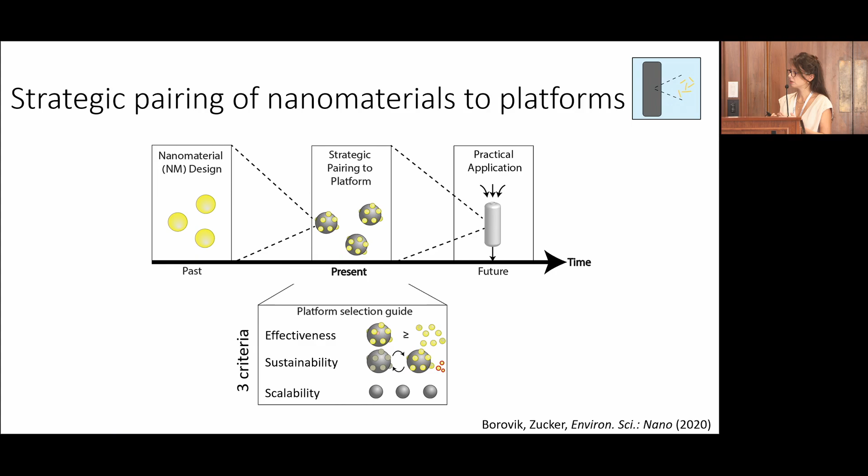This criteria include the effectiveness criterion. We want to make sure that once the nanoparticles are immobilized on top of a larger platform, it will be at least as good as it was compared to suspension form. We want it to be sustainable, to regenerate and reuse this nanocomposite with minimal leaching of the active component, and we want it to be scalable and compatible in large treatment plants.

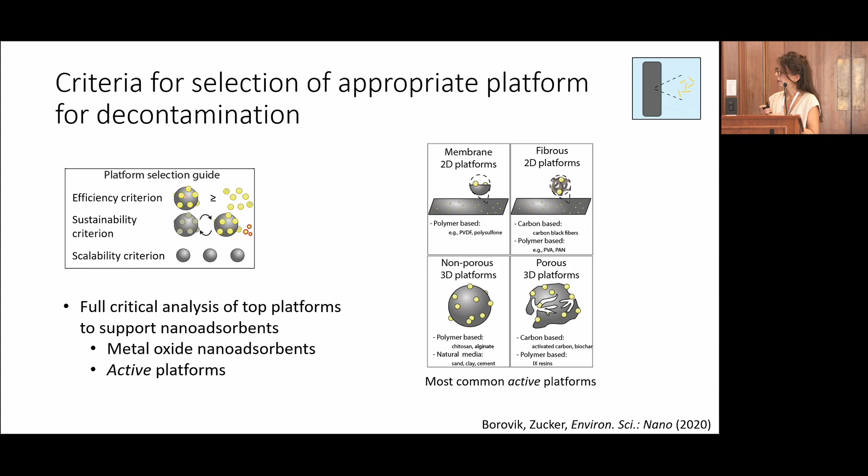So we took this criteria and conducted a full critical analysis of top platforms to support nanoadsorbents. We just took the literature that is relevant where metal oxide nanoadsorbents are used and coupled with active platforms. By active platform, I mean platforms capable of removing pollutants themselves, for example membranes, sand, activated carbon grains, ion exchange resins, and so on.

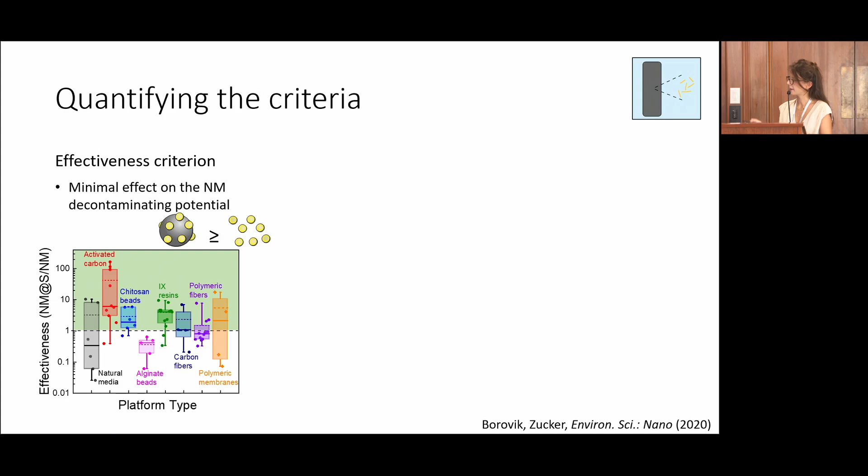Second, we look at the sustainability criterion. However, this is much harder to account for. We want to make sure we restrain nanomaterial separation, but the literature does not really report on leaching of the nanomaterial — only 20% of the relevant literature actually reported this value. So instead, we combined theoretical calculation of adhesive forces to rank these active platforms into low, medium, and high categories.

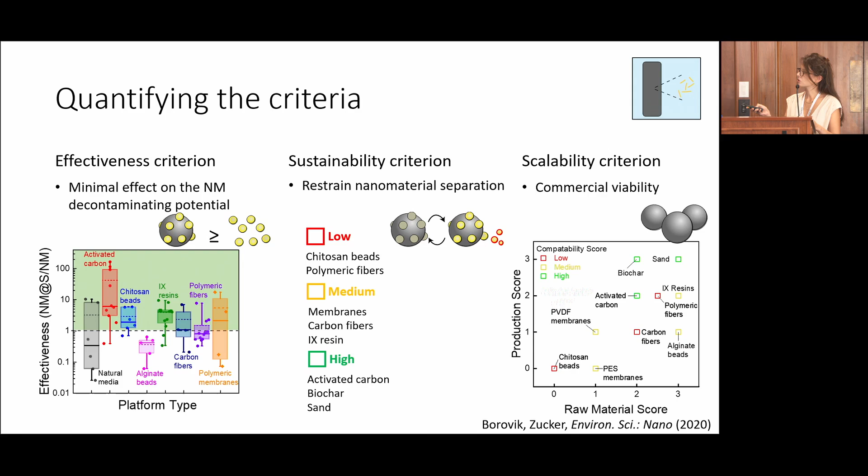Then we looked at the scalability criterion, or commercial viability, dividing it into three categories: raw material score, production score, and compatibility to larger systems. When we combine all of these together, we can clearly see that porous carbon-based supports are the best available platforms for nanoadsorbents.

This work was highlighted in Environmental Science Nano, and from this point I want to continue. So we always want to immobilize the nanomaterial we develop onto larger platforms, ideally carbon-based materials.

Now I want to talk about material design and some fundamentals, starting from the first nanoparticle we worked with, molybdenum disulfide. We're basically talking about a nanosheet — it's drawn here like a nanosheet, it goes through the wall. We have molybdenum in the middle, sulfur at the top, sulfur at the bottom. You can imagine a rug or a mat completely covered with sulfur atoms.

That sulfur can selectively absorb heavy metals through Lewis acid-base soft-soft interaction. The sulfur is here, and therefore it can absorb cadmium, mercury, silver, gold, and so on.

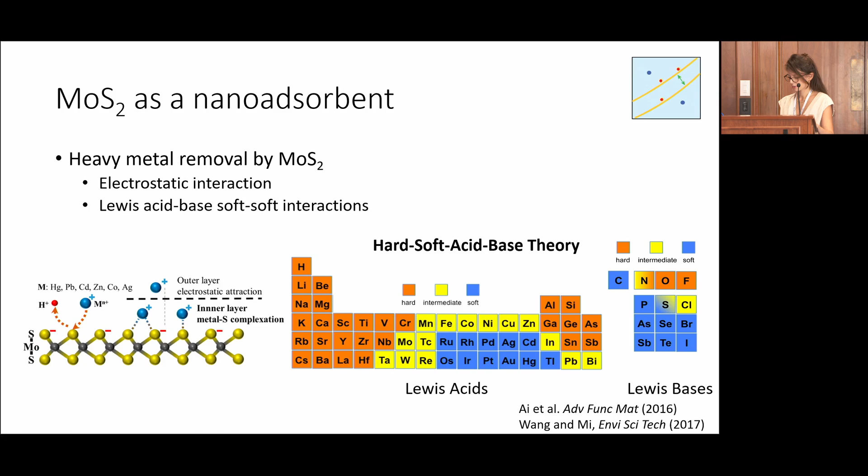So we took a closer look at molybdenum disulfide, and I want to start from the very first project, which began during my postdoc. Here we synthesized, or electrospun, a carbon fiber mat — you can also buy it commercially. Then we used the simplest scalable synthesis technique we could use, and that's hydrothermal synthesis.

We basically use an autoclave where we put the support material inside — in that case, carbon fiber — along with the precursors and solvent, close it, put it in the oven, take it out in the morning, and now you have your nanomaterial. We did that using different methods, changing the precursor and solvent type.

We eventually get these black mats, and we expect to see this lamellar structure in SEM images, which indicates the presence of nanosheets. And that's exactly what we got.

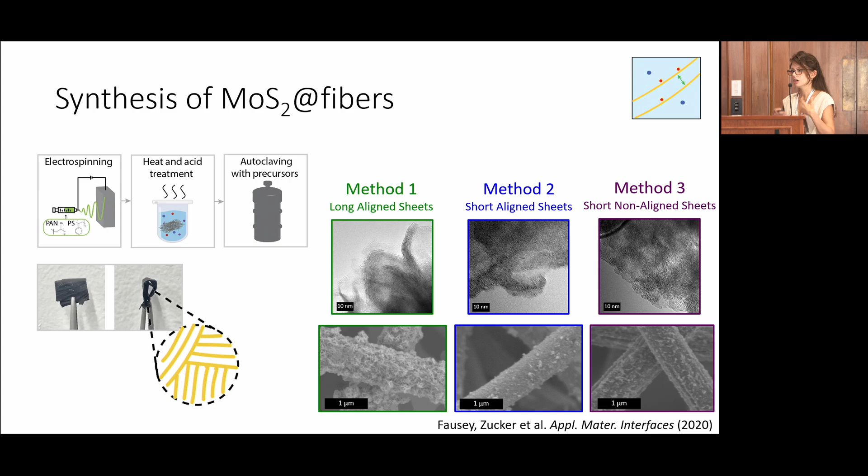However, it was very different when we changed the precursor and solvent type. In one case, we got long aligned sheets; in another, short, non-aligned sheets. You can also see from afar that the yield completely changed — in some cases there's a lot of molybdenum disulfide on the fiber surface, in others not. What was really interesting is that the synthesis method affected not only the characteristics, but also the performance.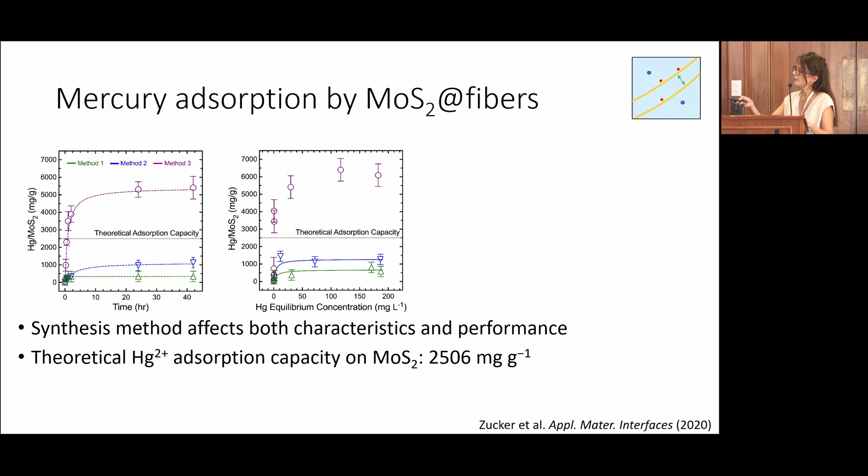So in method 3, we have additional mechanisms involved in the removal of mercury, and this is something we wanted to investigate. We found that it's highly related to the crystalline structure of the molybdenum disulfide. It appears in two phases typically: one is the 2H semi-conducting phase, and the other is the 1T metallic phase.

This 1T metallic phase actually results in a redox reaction, and in that case, the molybdenum disulfide, our active sorbent, is basically spent. It's been oxidized to molybdate ions, which are just leached to the solution. On the other side, the mercury is being reduced, and now it's more volatile. So this is not a desired reaction.

We want to make sure that adsorption is what's actually occurring, so we now eliminate this reaction by generating only the 2H phase, and we also keep tracking to make sure that this reduction does not really occur. For example, a pH decrease will immediately tell us that this redox is occurring.

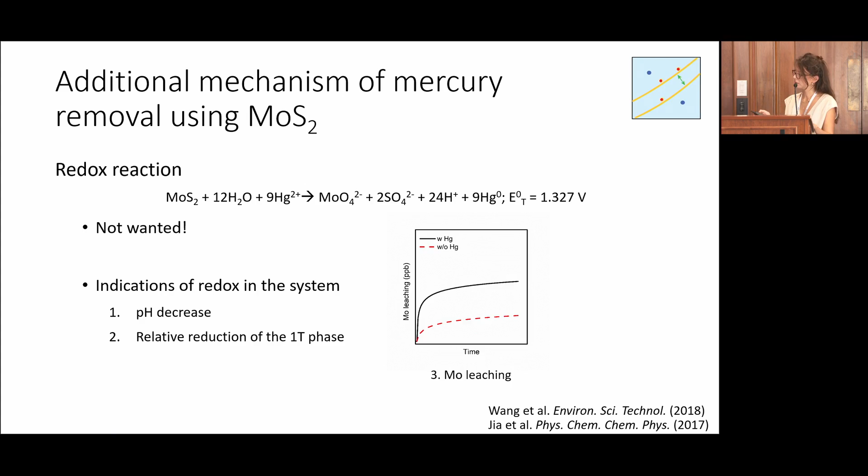Relative reduction in the 1T phase, also leaching of molybdenum—if it's higher in presence of the contaminant, then it means that we don't only have physical leaching, related to the adhesive forces between the support and the molybdenum disulfide, but also it is related to molybdenum dissolution through this reaction.

We can also look at the elemental mercury appearance. And yeah, this was about the mechanism.

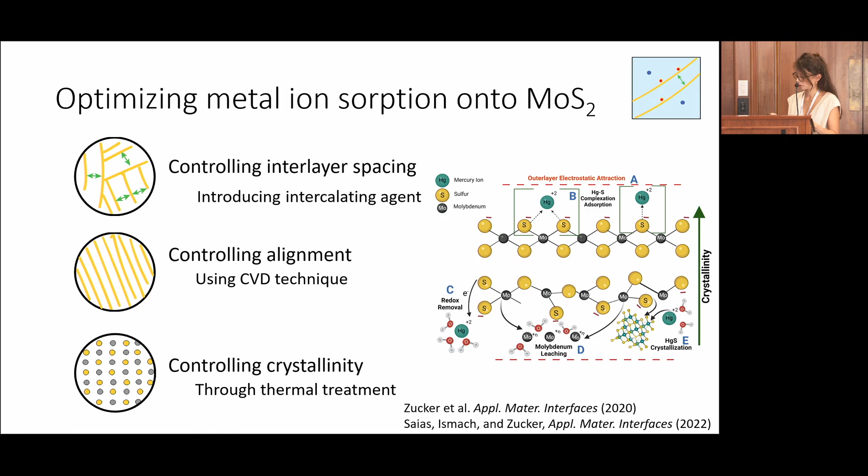We look at controlling alignment using CVD technique, and we also learn a lot about the effect of crystallinity—amorphous structure versus non-amorphous structure—which tremendously affects the adsorption capacity, the leaching potential, and also the adsorption mechanism itself. So with that in mind, this is a much more mature project compared to the second one.

So the second nanomaterial I wanted to introduce is manganese oxide, again a nanosheet in an alpha phase, which we deposit on sand. In that case, we use it as a catalyst to generate sulfate radicals. We basically expose this nanocomposite to peroxymonosulfate, PMS, to generate the sulfate radicals, and then we have the degradation of different types of trace organic chemicals.

This is a different approach than a typical AOP where hydroxyl radicals are formed, because the sulfate radicals are much more selective. That means we can tailor the reaction and target specific contaminants.

We can push this a little farther by immobilizing this manganese oxide on activated carbon, because in that case we will also have this bite and hook mechanism where the target contaminant will first adsorb, be in close approximation to the sulfate radicals, and then we will have better rates, very similar to what Adi showed us earlier. So it worked nicely for sand.

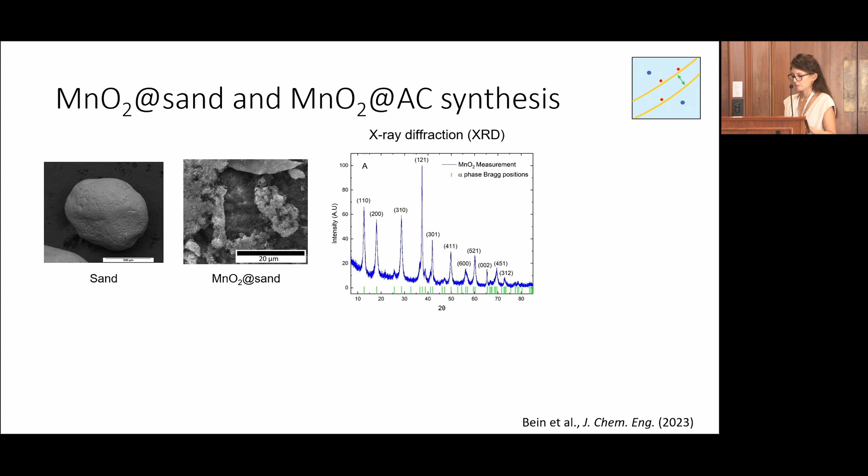We deposited the manganese oxide, by the way, in a similar hydrothermal reaction. We showed that we have this alpha phase, and I will show you activity in a slide or two. However, on activated carbon, it was not really successful—we have very limited deposition of manganese oxide on activated carbon.

The reason for that is that we have a lack of surface functionality and the fact that we have a hydrophobic activated carbon surface. So next we tried to optimize this coupling by having a pre-treatment to the activated carbon. For example, sonication improved the wettability and therefore the deposition rate, and also acid treatment, among others.

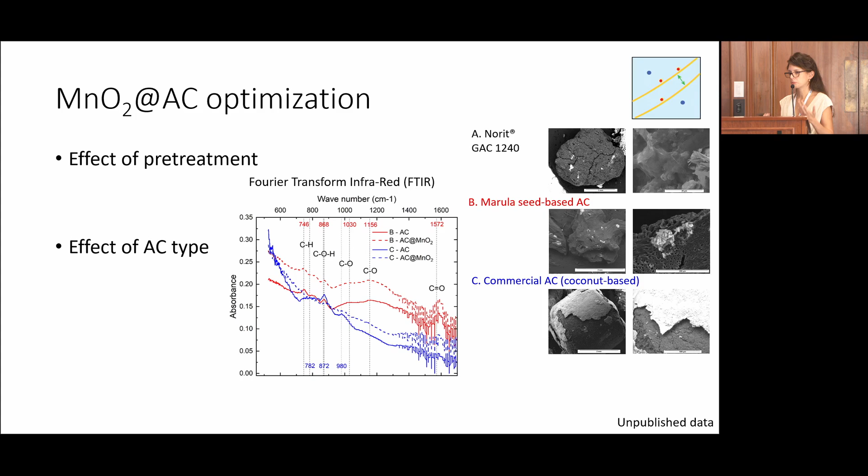We also looked at different types of activated carbon. For example, marula-based activated carbon or coconut-based activated carbon resulted in much higher yields, and this was correlated to the presence of surface functionality of these activated carbon types.

We went back to sand just to prove the concept, which worked really nicely. We packed the catalyst on top of sand in a column. We had this feed solution, which included the contaminants and PMS, and we showed that we can remove, both in tap water and in wastewater, different contaminants like carbamazepine, iodinated contrast media, caffeine, antiepileptic drugs, and so on.

We can also see that we have a low amount of leaching of manganese, and the PMS is still decomposing over time. In the last part, I want to talk about potential application.

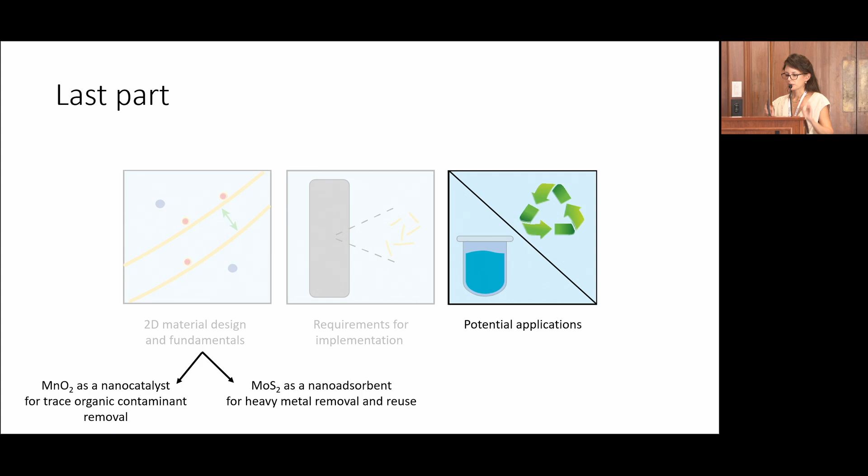Let's say that we already optimized these nanoparticles. Now, what's next? What do we need to do in order to use it in practice in wastewater treatment plants? First, and this is a very important part, which we struggled with in the last year, is the upscale. Instead of synthesizing 10 grams of activated carbon with our active component, we want to generate a kilogram of that in a single synthesis. Second, we want to demonstrate operation in real-world water matrices, not in clean water that is spiked with our contaminant. We also want to have competing contaminants, ions, and so on.

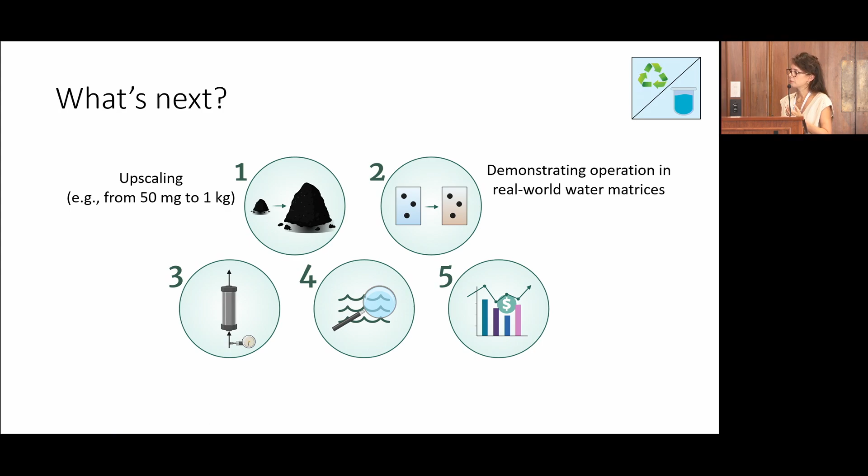Then we want to design a flow mode filter reactor, which will allow us to do dimension analysis and to upscale the system in order to achieve a pilot-sized reactor. And then we want to assess stability in long-term operation and compare it to the best available technology. That's the plan. It's a huge plan, and I'm going to show you some of the results.

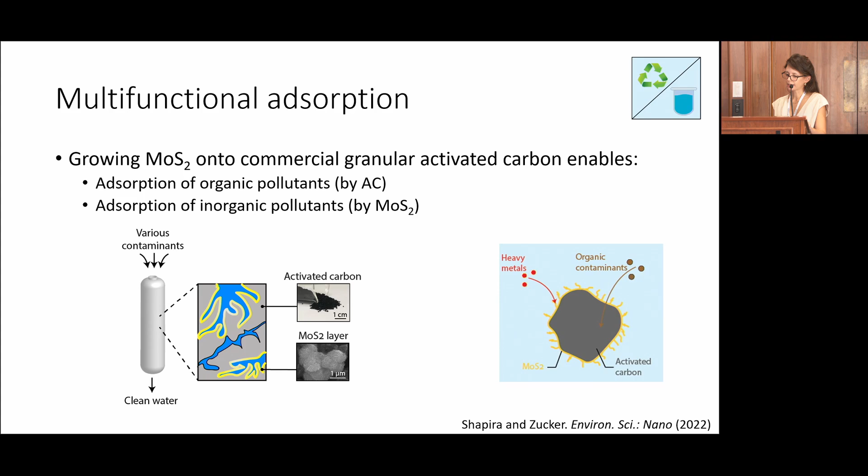So first, we coupled the molybdenum disulfide on top of activated carbon, and we wanted to prove that it can be used as a multifunctional adsorbent. The activated carbon will remain active, although it has this coverage of molybdenum disulfide, and it will adsorb organic pollutants, while the molybdenum disulfide will adsorb inorganic pollutants. And we were able to show that simultaneous adsorption by using mercury and methylene blue as model pollutants.

We also show minor effect of background ions and great operation in presence of complex media. In that case, we took contaminated groundwater with mercury and other materials from a site in Israel. And we also show efficient removal of mercury in multiple cycles with minimal molybdenum leaching.

So in terms of the upscale, we have different stages that we wanted to accomplish. First, in the same synthesis, we want to increase the amount of activated carbon while holding the precursor amount and solvent amount the same. Then, after we have this optimal maximized ratio, we want to increase the content of both activated carbon and precursor at the same synthesis, and then we increase the batch size or the reactor size.

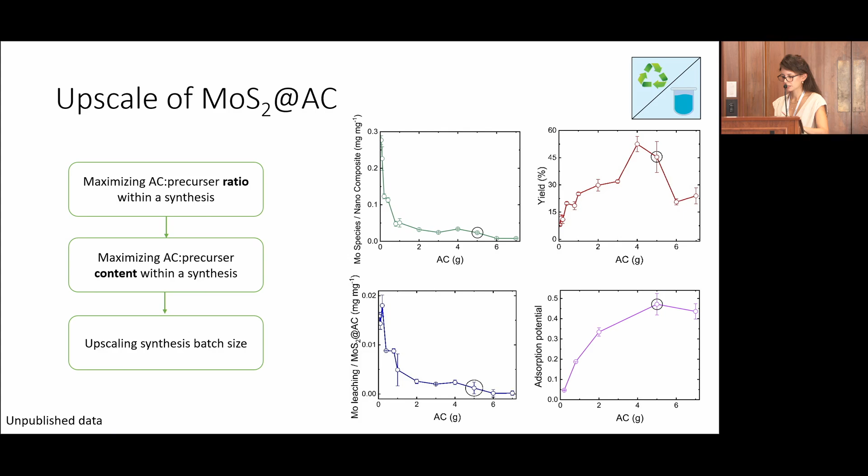So these are some results from the last month for the first part, where we increase the activated carbon amount, and actually it came out really nicely. What we see here is that the thickness of the molybdenum disulfide layer is decreasing when you increase the activated carbon amount, the platform amount, while holding the precursor amount the same. It makes a lot of sense. It's still very active, so when we look at the adsorption potential, it just goes up and up and up until an optimum point. We also see that the leaching is going down and that the yield is increasing. In that case, by the way, all the adsorption tests were conducted with silver and not with mercury.

In terms of the manganese oxide on activated carbon project, we already have a site where we plan to implement this technology. This is being conducted together with Professor Jörg Drewes from the Technical University of Munich, and we're going to use an existing pilot plant in the city of Schweinfurt, in the project called Nutzwasser. But beforehand, as I mentioned earlier, we want to examine in a flexible reactor in the lab the different operational parameters.

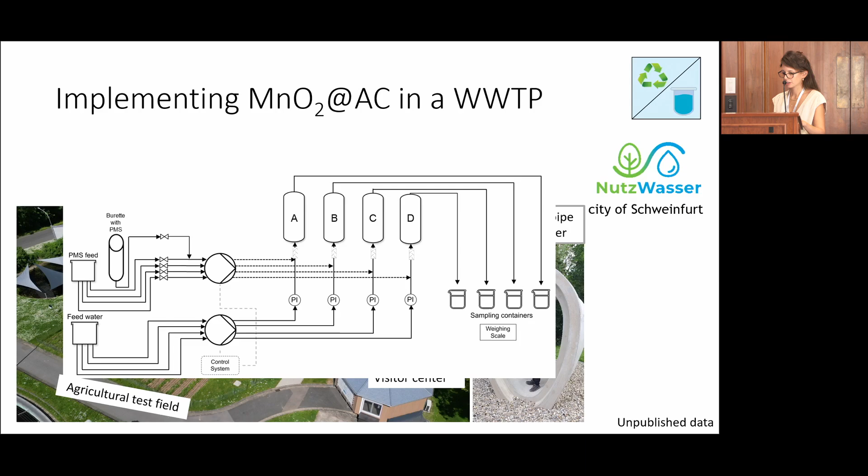So with that in mind, I want to summarize what we saw so far. We have a sustainable use of two different nanomaterials for contaminant removal, which can be used for wastewater purposes or wastewater reuse. In terms of material design, we optimize adsorption through controlling interlayer spacing, nanosheet alignment, crystallinity, and so on. We are able to couple the nanoparticle with the support in a scalable synthesis procedure. We have much more understanding of the mechanism of the interaction, and we want to minimize undesired reactions.

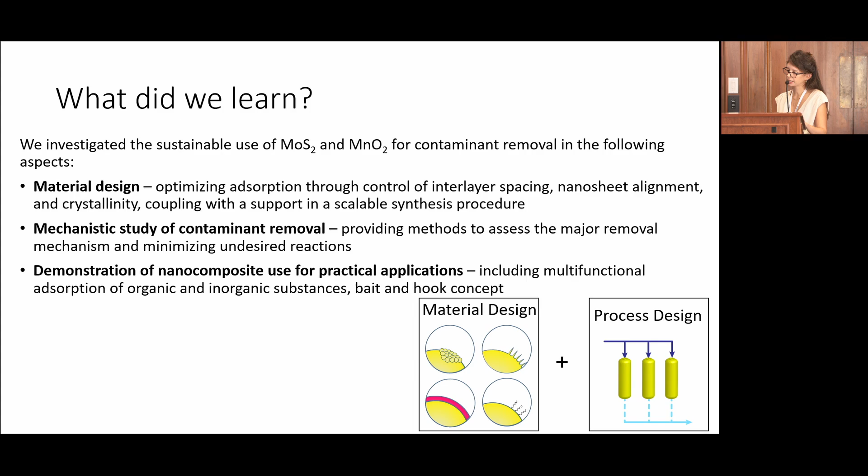And we have demonstration of this nanocomposite use in practical application, including multifunctional adsorption of organics and inorganics, and this bait and hook mechanism. I always put this very simple illustration when I talk about this topic, because I really believe that we should focus not only on material design, but also on process design, and we should take advantage of the knowledge accumulated in these fundamental studies to bring them to practical use on a larger scale.